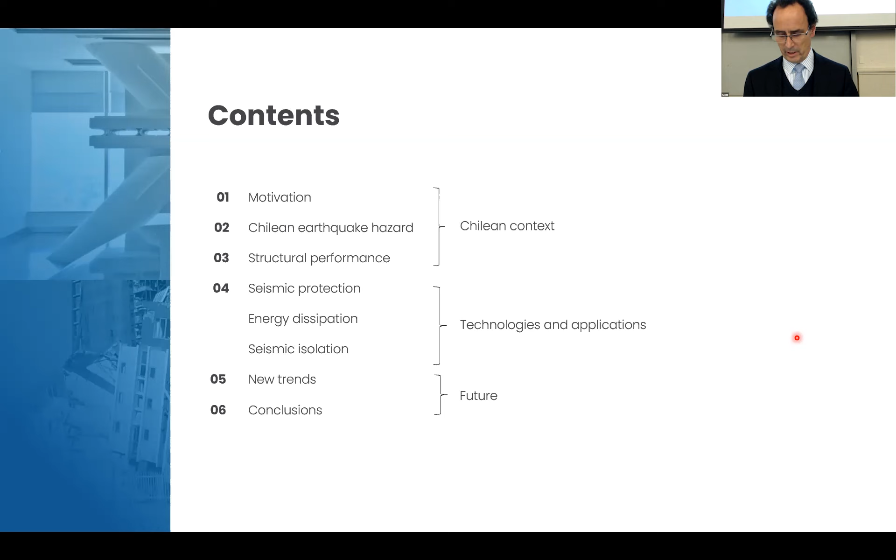Thank you. So the presentation will be mostly in three parts. First, I will speak about the Chilean context - not all of you know exactly what happens with the earthquake problem in Chile. The second section will be more about the technologies and applications we have used. Many of them are probably familiar to you, but others could be of interest. And at the end, I hope I can say a few words on what I think could be the future.

So in terms of the earthquake hazard in Chile, we are actually at the convergence of two plates, the Nazca plate that moves about 7 meters per century - that's about the convergence rate of the two plates - and the South American plate. The Nazca plate goes underneath the South American plate, and we get along this trench different sections where the plate is really locked, completely locked, 100% locked.

The other thing is that in Chile, we've been increasing tremendously the amount of data we're gathering from these earthquakes. And when I saw the QuakeCoRE project making New Zealand a natural laboratory, we speak about the same in Chile - we want Chile to also be a natural laboratory for earthquakes. So we have an opportunity here of joining these two natural laboratories.

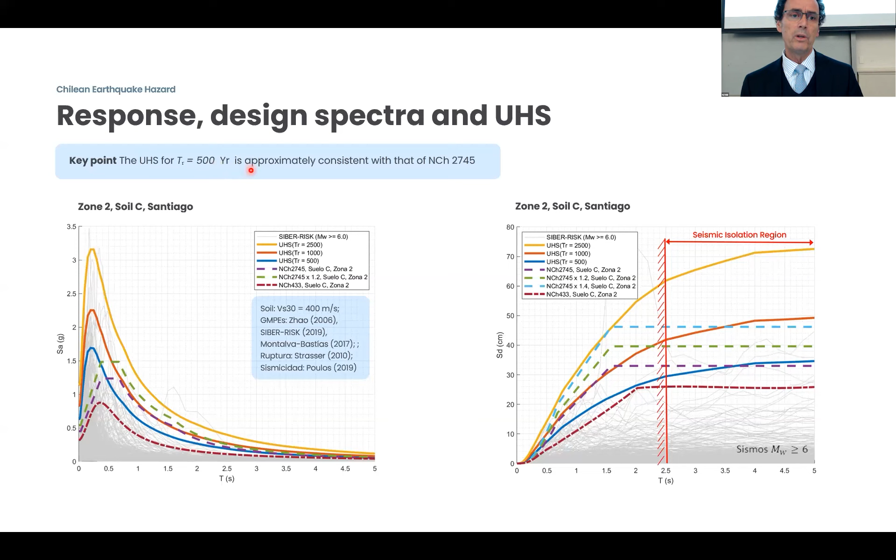In this case, the typical design in Chile is done for seismic isolation, for example, with periods that go above 2.5 seconds. We use this spectrum here in purple, which is more or less not too different from the new uniform hazard spectrum for a 500-year return period. We have another spectrum for seismic isolation, for the 1,000-year return period.

One thing that's probably new is that we've been using satellite data to try to get good information about these earthquakes.

So if you get rid of several other components, you can compute the displacement field of the crust in the direction of the satellite. We use that data, that displacement field, and do an inversion problem, and we get the slip distribution of the fault using relatively simple Okada formulas for doing that.

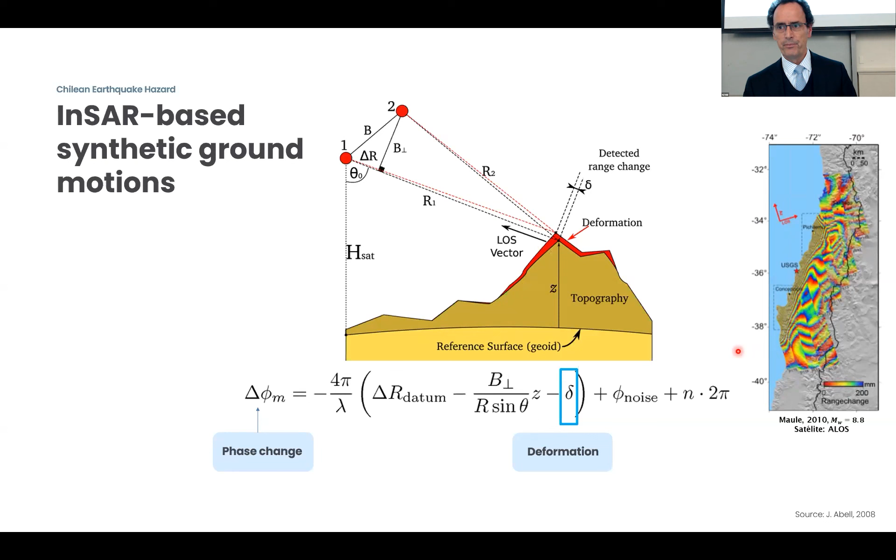This is the case for the 2010 Chile earthquake, and we obtained from the interferometry the figure shown to the right. If you look here, the length of the rupture is about 550 kilometers long. That was an 8.8 magnitude earthquake in 2010.

You go back and do this inversion problem, and you get, for example, slips of the fault of about 12 to 15 meters. The epicenter was here. This is the first earthquake we've recorded in Chile that is called bilateral, it ruptures the fault toward the north and also toward the south. First time in history that we know of, at least in more recent history.

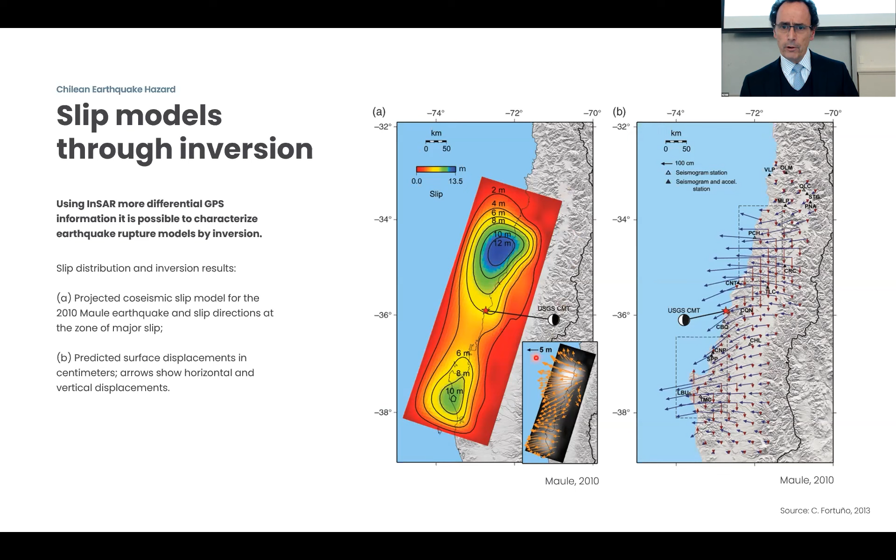So once we get this data from the slip distribution of the fault, we can compose these low frequency ground motions. We combine that with stochastic models for the high frequency signals, and we compose the two. We create these synthetic ground motions that, if you integrate them, are able to capture the displacement, the residual displacement of the crust.

I was really interested in this because we were working on some problems in practice. For example, LNG tanks that have sloshing periods for the fluid of about 20 seconds, that's the period for the tank sloshing. So I needed data useful in terms of displacement and low frequency motions to see if the isolation system somehow goes into resonance with the sloshing modes and things like that. That was the reason that motivated this part of our work.

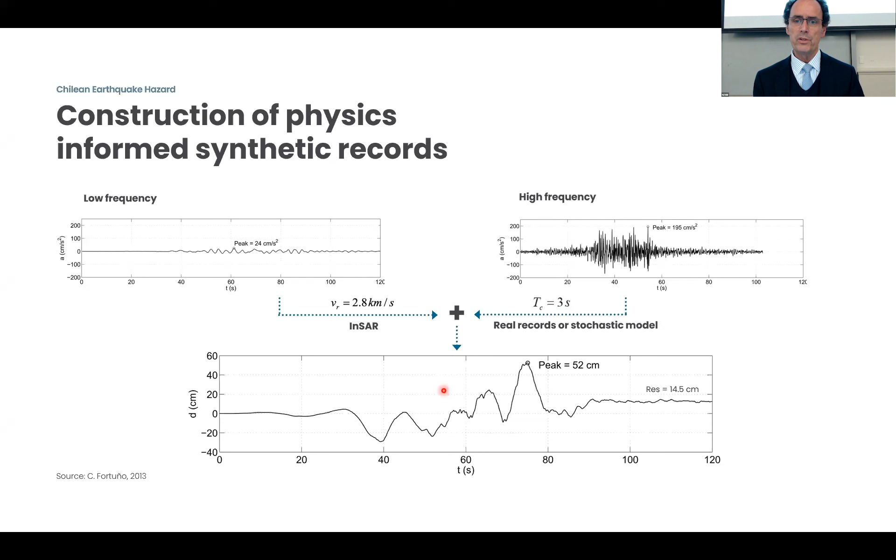So basically what we've done today is take all the Chilean records and reprocessed them to really capture not only the high frequency part, which is always rather well captured, but also the low frequency part. This is basically the database we created, and you can access this today.

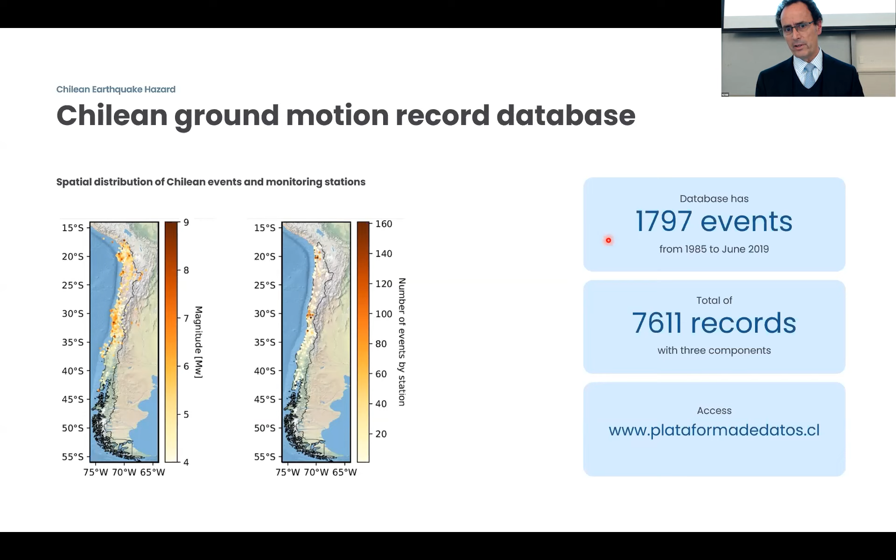We took all the Chilean records and reprocessed them, and they are available in this platform for Chile. This is the database we're using for creating all the new ground motion models for the country.

The second context I wanted to speak about is the typical Chilean building configurations, probably not too different from the ones used here. But I was really concerned before the 2010 earthquake with this type of configuration: a shear wall core at the center and a perimeter frame, very common for office buildings in Santiago today. This configuration was never tested before in Chile with a 1.5 minute long earthquake, so that was the reason for studying this.

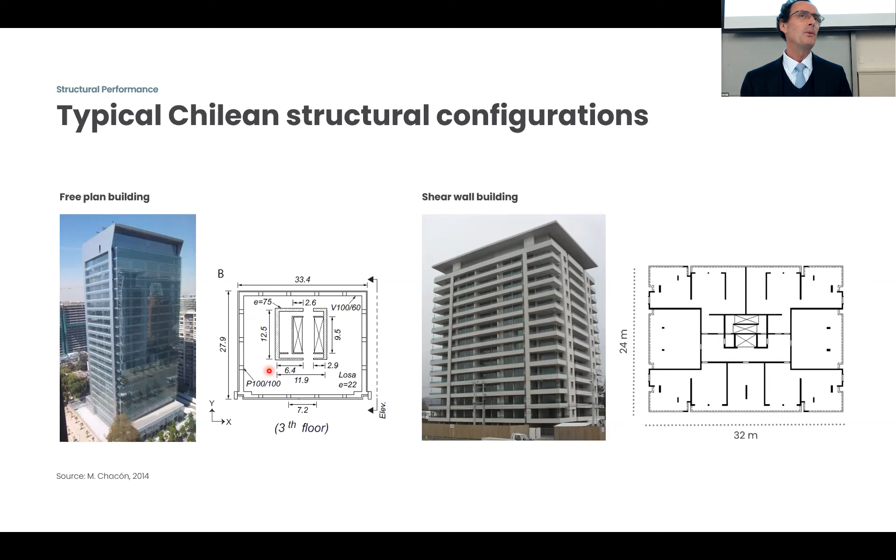We had shear wall buildings, fishbone type structures, that did so well in 1985 in the Chile earthquake that many researchers in the world spoke about the beauties of this configuration. Guess what? What worked really well in 1985, the building on the right, didn't work so well in 2010. So we discovered new things. We'll see right away why. And these buildings on the left did incredibly well, although we were really concerned.

The question is, was it obvious? This escaped every single structural engineer in the country. The best ones never realized that this could happen.

We had this experience in 1985 in the Valparaíso Algarrobo earthquake, and all the buildings in Viña del Mar and Valparaíso, the coastal cities near Santiago, did very well. But suddenly we saw this compression failure of the boundary element, with spalling of the cover, then buckling of the longitudinal bars, and then the rupture just propagating into the web of the wall. Big thing.

60 buildings like this in Chile. Only one of them collapsed, but 60 that could have collapsed. We started working, and a lot of people, not only us but many others, started working on trying to understand what happened here.

What we discovered right away is that this has a lot to do not only with the confinement of the boundary element, but also with the axial stresses on these walls. Very high axial stresses. If you look at the mean axial load ratio of these buildings, it's pretty low, about 10%. But if you look at the dynamics of the building, it gets up to 35, 40, even 50% axial load ratio, pretty high, because of dynamic coupling, and the slabs actually play an incredible role in transmitting that through shear.

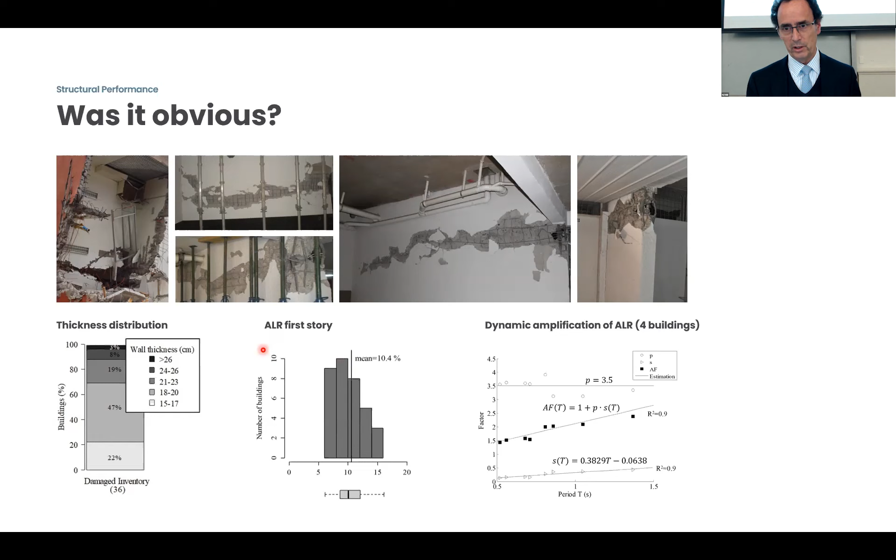So we started really changing the way we design shear wall buildings in Chile. Today we have much better control of the actual stresses on the walls, and we check for confinement and also for ductility of these walls in the design. That was, I would say, one of the most important lessons we learned in this earthquake.

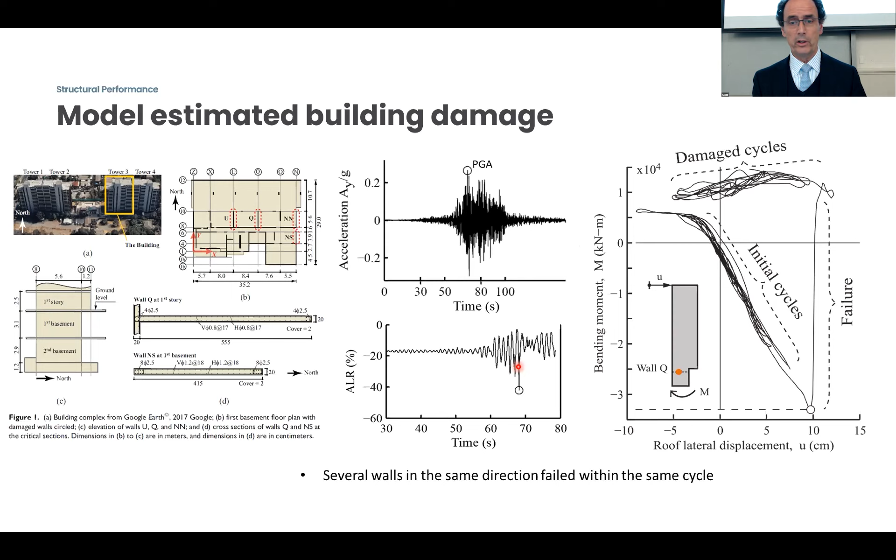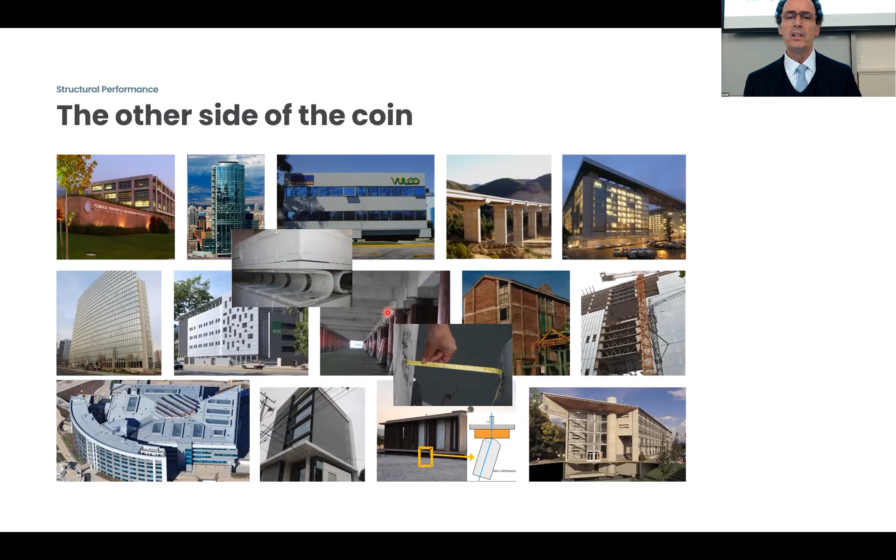But there was another side of the coin, having to do with all the seismically protected buildings in Chile. We had 13 buildings in the region where the earthquake occurred. Since 2003 until 2010, I was really kind of praying in the desert in Chile about incorporating this technology in buildings. We tried different configurations: very tall buildings, precast buildings, ports. All these were different tests, and I think it was kind of a good natural test of these structures, which I'll speak about more in the next slides.

One of the cases that really caught the attention of professional engineers in Chile was this building, 54 stories in Santiago. It was just finished when the earthquake came.

We introduced metallic dampers on these transversal resisting planes. You see here the configuration. Basically, we just changed the concentric braces, cut them, and introduced at the center a metallic damper system. These are C-shaped plates.

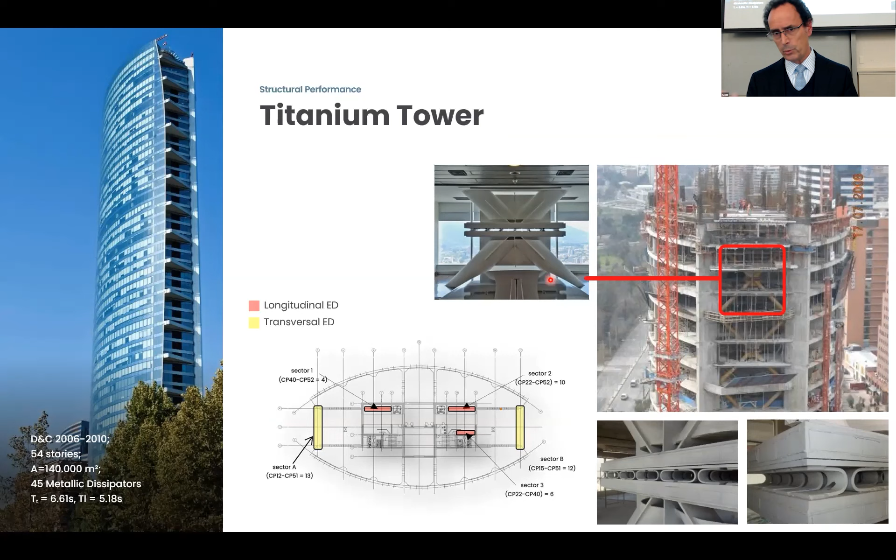After the earthquake, we checked every single plate here. You will see that they are all yielded a lot. Looking at their configuration, we realized that we probably used them up to maybe half of their capacity. That's why we recommended the owner of the building just to leave them there. You could really take them out because these concentric braces aren't taking any actual load, so it's pretty easy to replace them.

The second case that was interesting to the community was this port in the south of Chile, the only one that remained operative after the earthquake. What we did here was interesting: we interrupted the batter piles in the connection to the deck, and we introduced these tables you see here in the plan of the port.

This is 420 meters long with 48 batter piles. We introduced seismic isolation on top so that the lateral stiffness of this seismic isolator is comparable to the lateral stiffness of the vertical piles. Basically, we redistributed all the seismic loads in all the elements of this wharf, and it worked really, really well.

You see here, this is Professor Eduardo Miranda, his hand, by the way. It's a 20 centimeter displacement. Actually, this is basically a PVC pipe that just touched the port, so at least we know that the thing deformed 20 centimeters in that port.

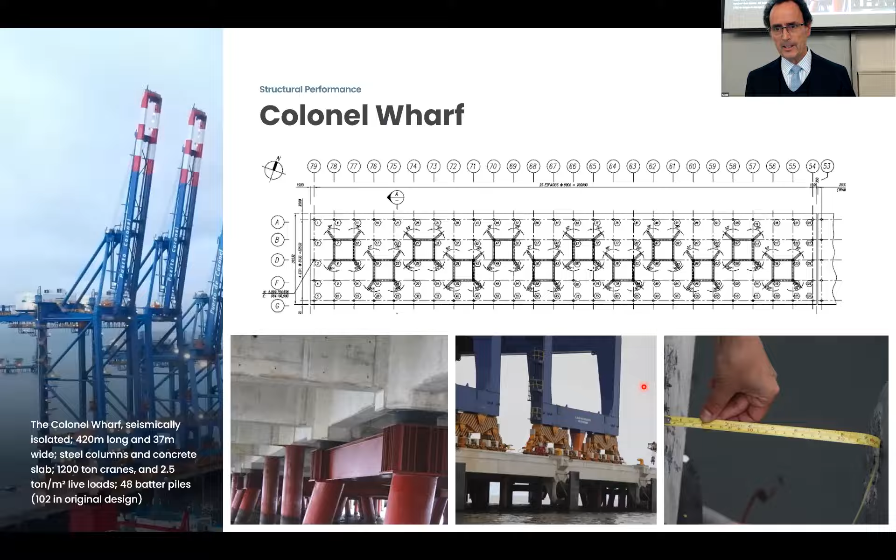So this is basically the motivation, and let's go quickly into the seismic protection ideas. You know very well the two technologies: energy dissipation, where we're just connecting two different points in the structure that have a relative deformation or relative velocity; and seismic isolation, where you really interrupt the direct connection between the ground and the structure.

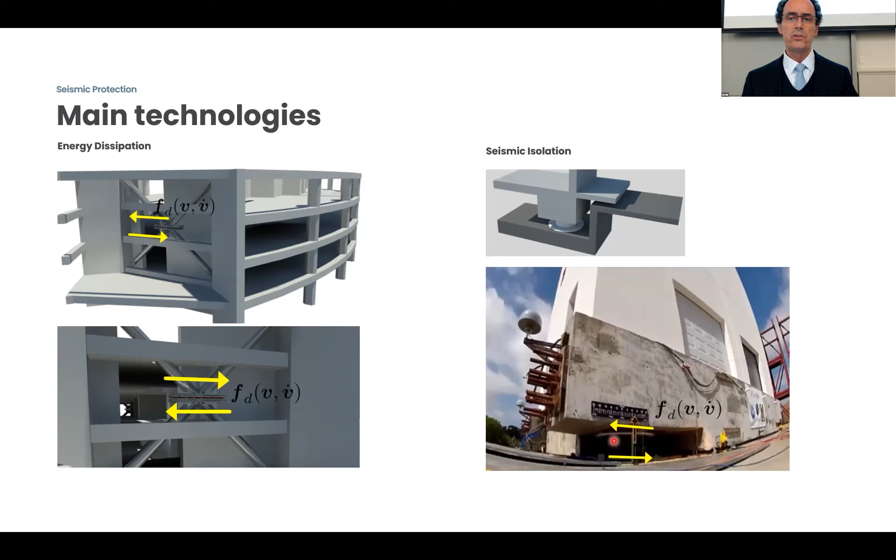You can use the isolation not only on a single layer; you can use it at different heights within the structure. The only thing important for you to know is that in the equations of motion of any structure, what you're doing is introducing a new term, a new restoring force that will help you dissipate the energy that the ground motion is introducing into the structure.

And you are the only real owner—this is an automatic control problem. You really can control that term. You can control it because you control the position of the devices, you control the quantity of the devices, and of course the type of dissipation you're going to incorporate.

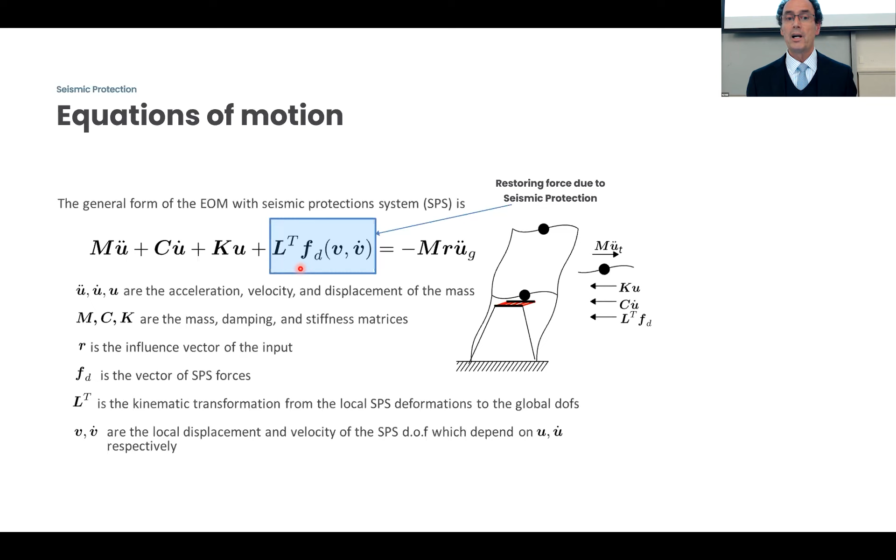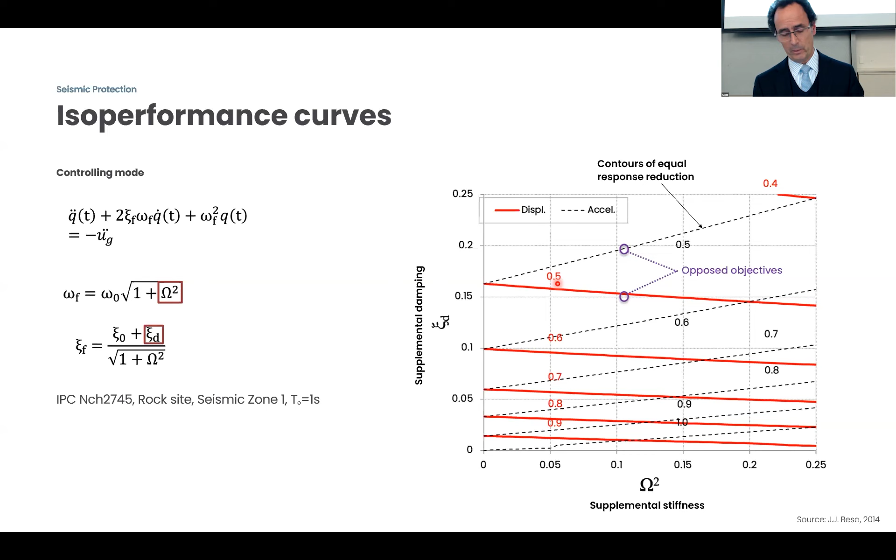So what I'm saying here is with a very simple diagram, you can really define, before you just get into what kind of devices you want to use, exactly the type of design you are going to be getting. You get maybe 80% of the truth with a diagram like this.

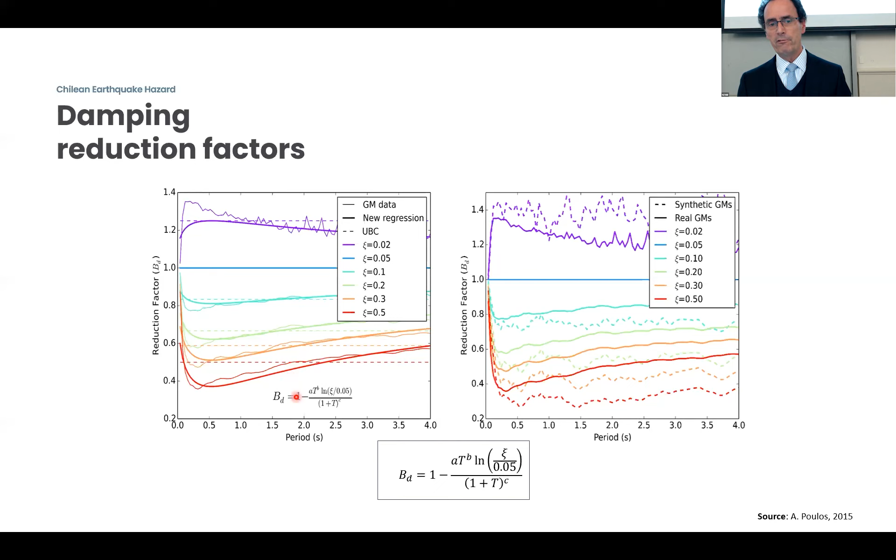And of course, you can compute the reduction factors for damping. These are the new ones that we're proposing for the Chilean code. We made a mistake, actually, because we didn't have the data in 2003 when we just presented the first seismic code, and we used records that were compatible to the design spectrum. If you use records compatible to the design spectrum, they have too much energy and they dissipate too much energy afterwards, and they're not realistic. When you use real records, you get curves like this, where the efficiency, of course, decreases with the period of the structure. So we're just modifying our B factors in the Chilean code now by these expressions.

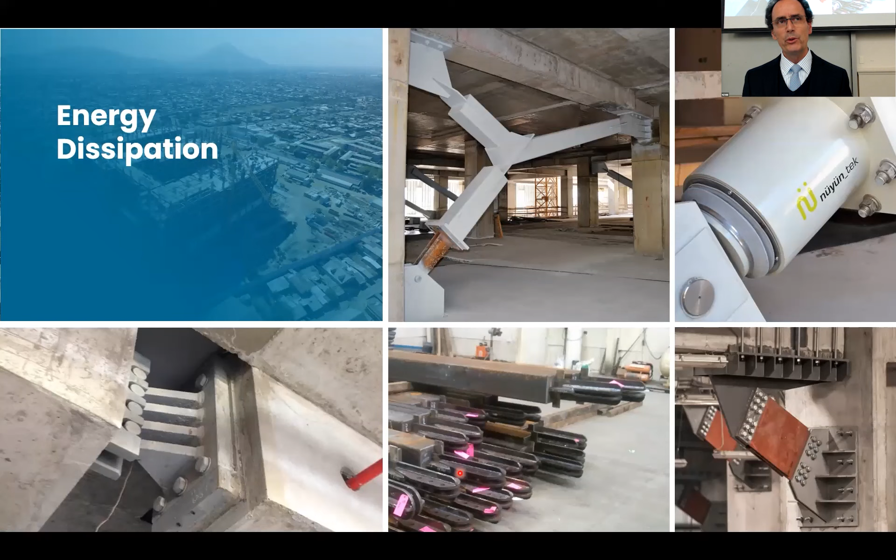Okay, that's enough of the fundamental components, and let's get into the hardware and the applications more.

We tried with metallic dampers almost every single thing, geometries, materials, and so forth. And this is only one example of the kind of things that people have tried. The U-shape or the C-shape damper, by far, in my perspective, I think is the most effective one today.

But for example, we discovered that if you take copper and you just do annealing with it, you subject copper to, I don't know, 600 degrees Celsius, just keep it for 3 or 4 hours, it becomes incredibly ductile. I did this research work when copper was maybe 70 cents per pound. Today at $4 or $3.50 per pound, it's basically impossible. But of course, it's also a good material for resisting corrosion and so forth.

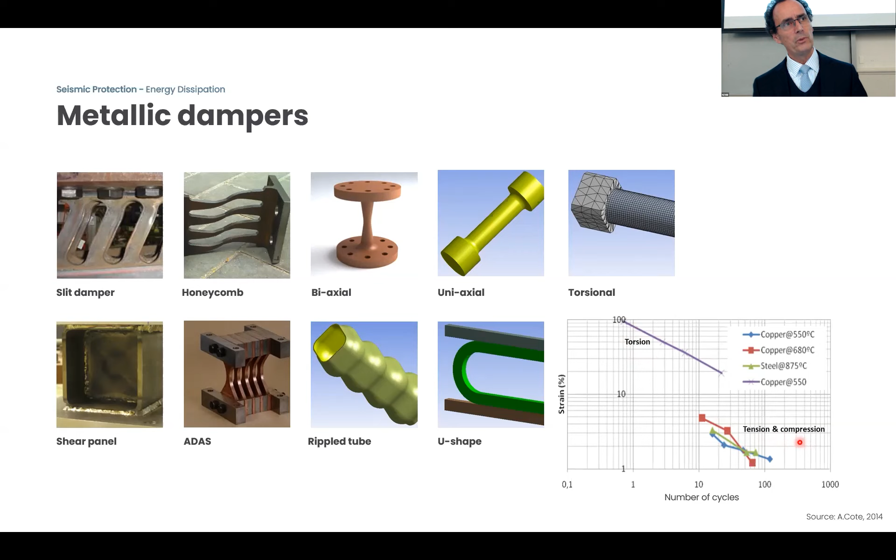But if you look at this, you can see that if you apply this into torsion, you get a very ductile component. So you can define, for example, a metallic damper device in torsion, and it's incredibly more ductile than if you do it in tension and compression. Those kinds of things are interesting, and we've been playing with them for many years.

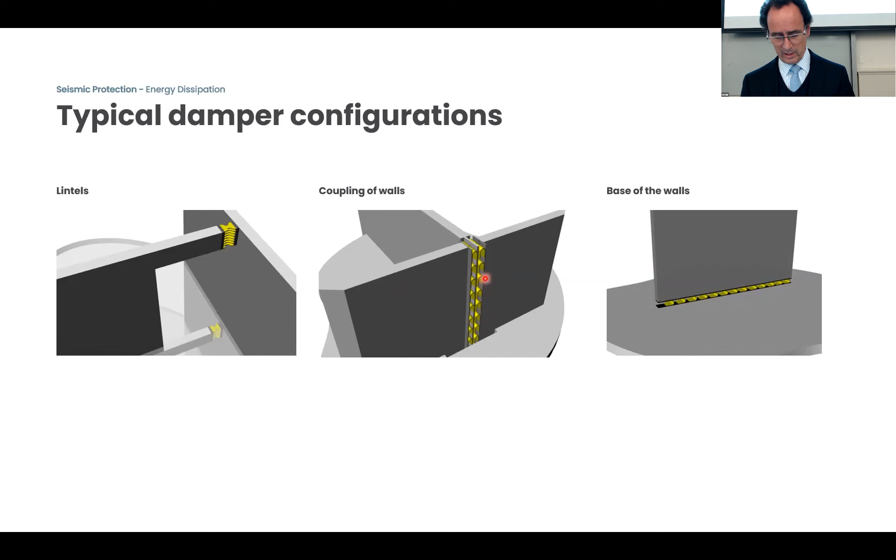The disposition of these dampers can be very different. We've used them as lintels. We've been cutting shear walls or whatever in between, also as lintels, in the other direction. And for example, the titanium tower that I showed you before is one example.

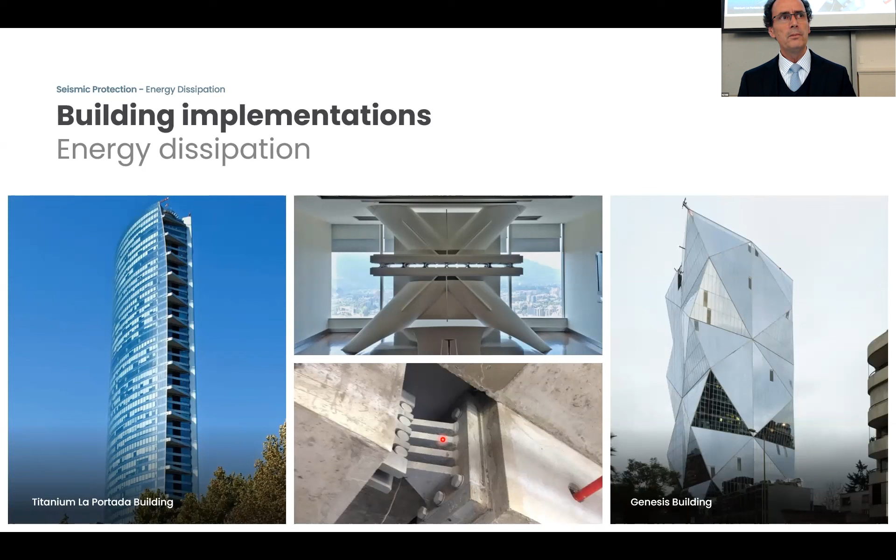Also, in the case of buildings like this one on the right here, we just cut the lintel and introduce these TADAS devices. The TADAS, which I'll show you in a minute, have only one thing you need to be careful of, but apart from that, they work extremely well.

This is actually a retrofit we did in Ecuador for a hospital, a pretty old hospital. You see the dampers there. It's a very trivial solution. You just go and wrap this casing for the beam, and just get the dampers underneath here.

Actually, I could—well, there is a video there that maybe you can run later. But let me see if I can do it. I have to probably escape from this.

I don't know how to do it, but anyways. One thing that is important that I wanted to mention to you is that if this device gets not only in shear but also in tension, because the hinge here doesn't allow the vertical motion, then your device will not work.

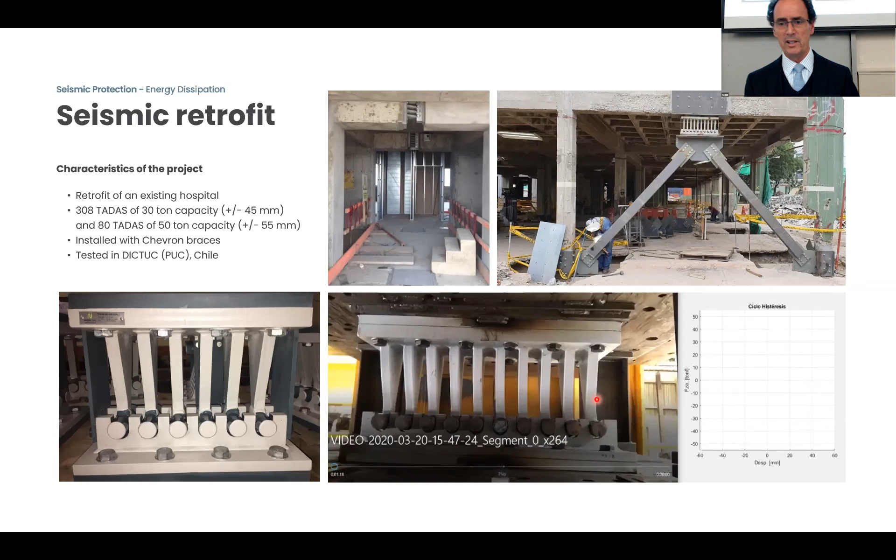What you need exactly is that this goes only in shear, and the plates, when they bend, this point will move up and down, and you need to allow that motion. Otherwise, you're going to get a membrane action on the plate that will basically kill your ductility. That's a very important thing that we discovered after many testing.

The other things we have done is basically self-centering systems. I know there are many ideas around this, but the concept behind is very similar. We were trying to find these flag-shaped behaviors with zero residual displacement. So you get hysteretic behavior, but then the system self-centers. And actually, the principle behind it is very simple.

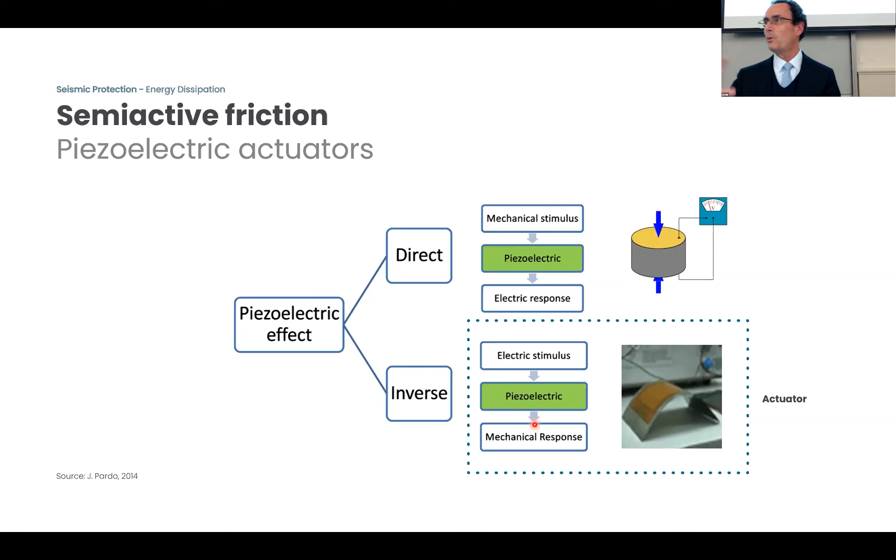They work both directions. So basically, what we did, we introduced, for example, in this case, our plates are sliding one with respect to the other, and we introduced these piezoelectric elements here. So they react, and we apply a very small voltage here and increase the axial load in a semi-active way. So we decide what kind of friction we want for every specific moment on the device.

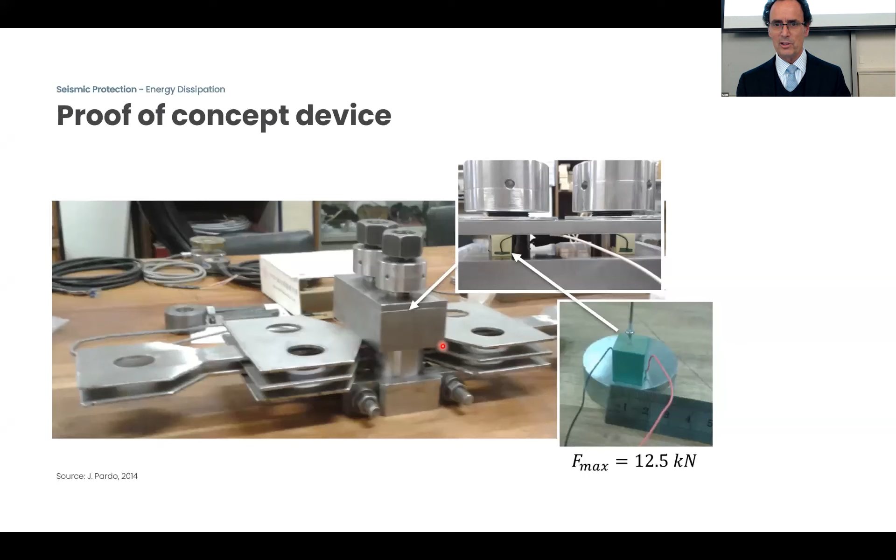This, of course, is a prototype for a laboratory. This can be improved tremendously when you just go into production of things like this. The result is this: you can control friction as much as you want here. Of course, we were not very successful in this dynamic range, we got only a factor of 1.9. I think if we get more creative, we could really increase this range for just modifying friction.

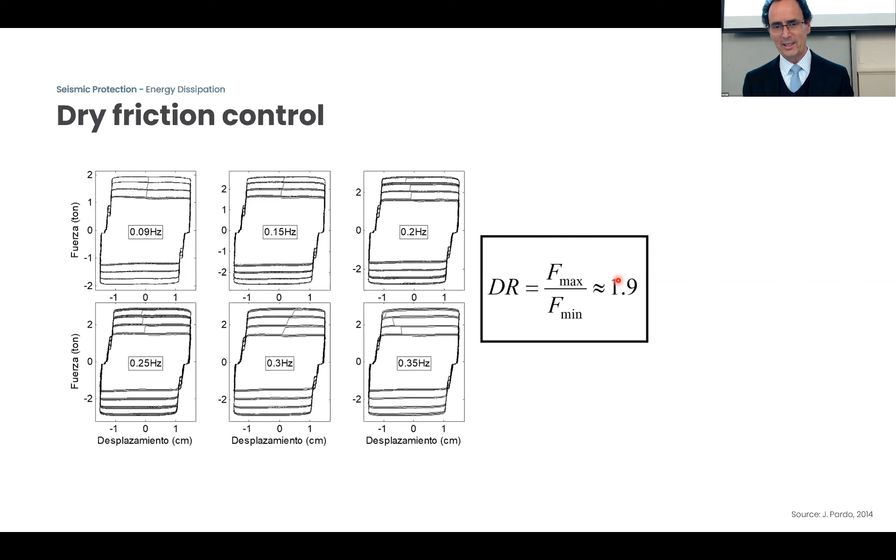The idea is not to have a single device during the earthquake, but have multiple devices depending on the response you want to optimize. That was the idea.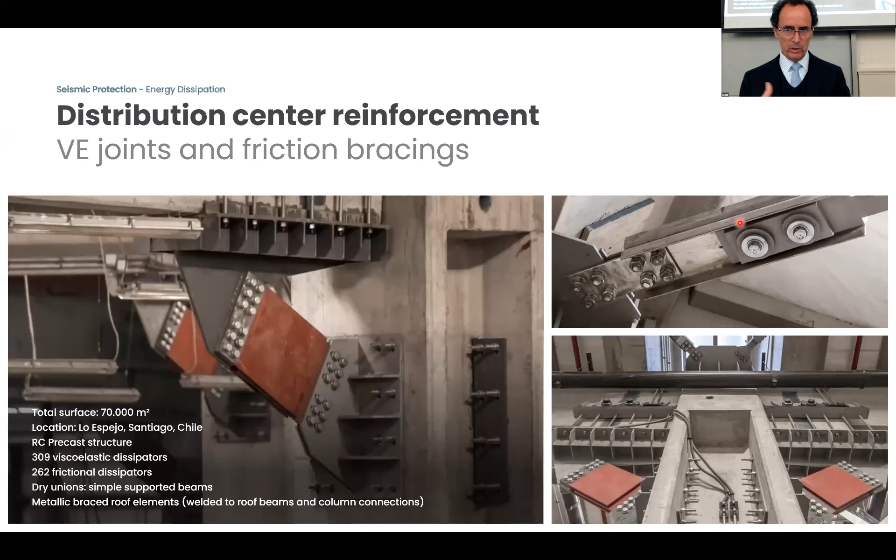The other thing that happened to these structures is that most of the bracings at the roof collapsed in another distribution center, and we just put here a frictional fuse. Basically, it's a very simple system that controls friction force, so the bracings never buckle, essentially. That was pretty simple, and another low-cost solution.

When we move into viscous dampers, the trick here is basically the one shown in this figure, that you have force and velocity, and you want this force and velocity to really saturate. If it doesn't saturate, you're going to kill the joint. So we need this to be like this, and for that, you need to create or obtain a behavior in the silicone fluid that is called shear thinning. Basically, you can really control this behavior only by using the appropriate fluid. That is exactly what we do.

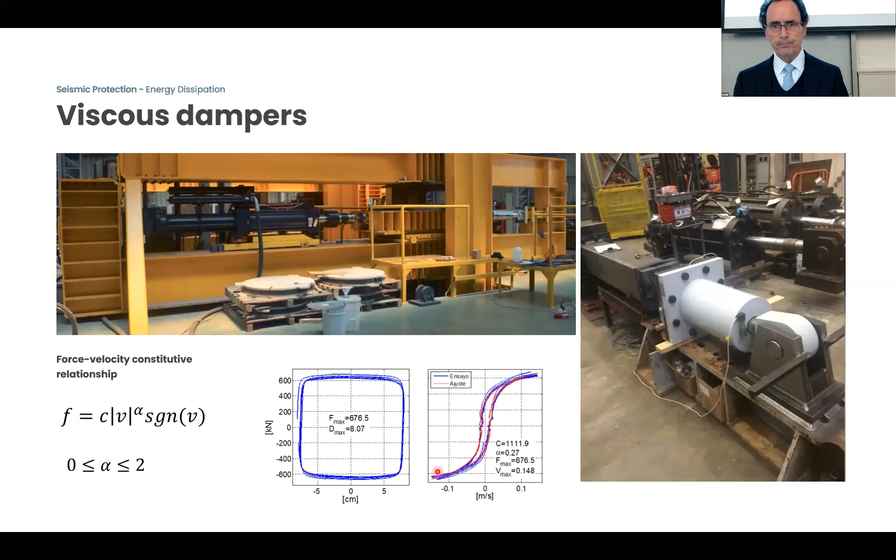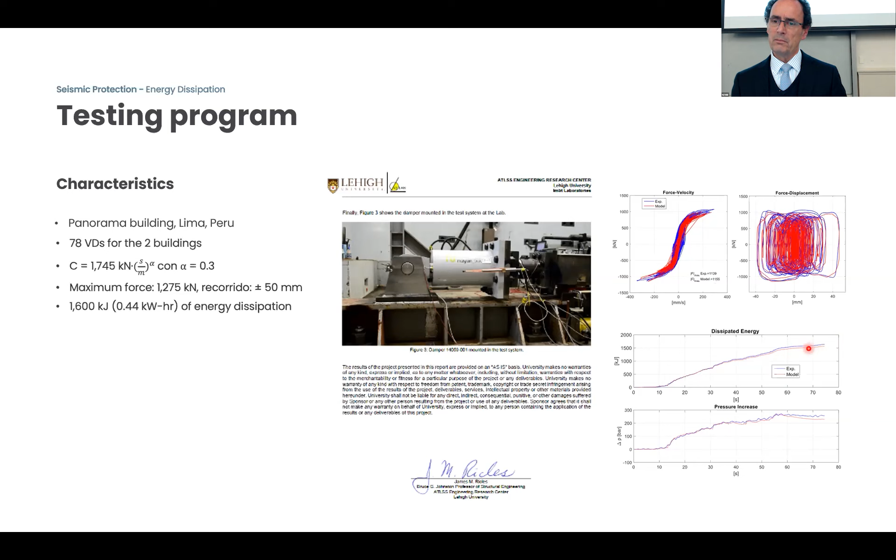This is one test that we did for the Panorama building in Peru, and basically you see that your model expressions match almost perfectly well the testing. One thing is that it also matches well the dissipated energy and the increase in pressure within the damper.

Of course, when you start dissipating energy, the pressure within the damper will increase tremendously. You will see here that we can get up to maybe 250, almost 300 bars within the damper. So you need to design that damper for that increase in internal pressure when it gets really hot.

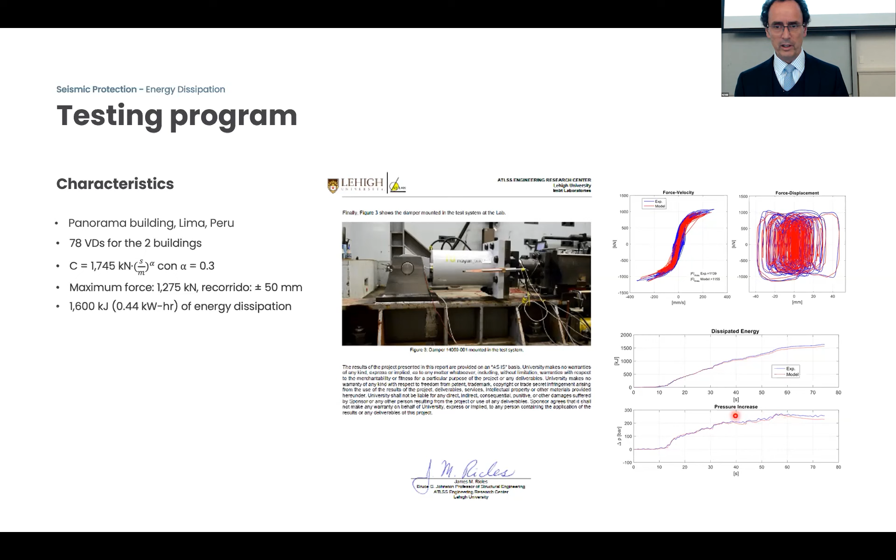And dissipating energy. The modeling is simple. It's basically a Maxwell element that gives you a nonlinear damper here. Remember that velocity is raised to the exponent alpha. We use alpha usually equal to 0.3 in our designs.

And basically we incorporate an elastic element in series with this nonlinear damper, and you create this behavior that has this cycle here, basically due to compression of the fluid. You need to capture that part.

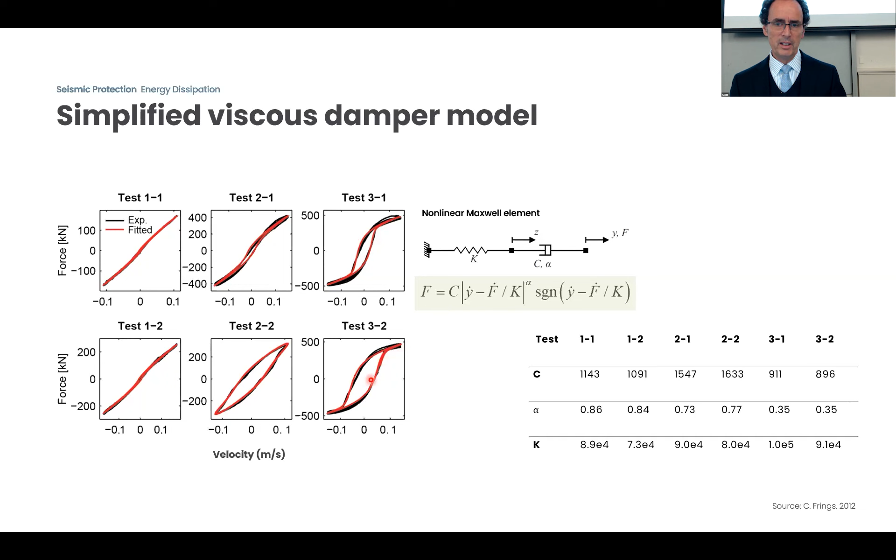And the applications are basically in hospitals. This hospital was very interesting because it has seismic isolation, but also the towers - we could not control the displacements because they are very, very flexible. So we introduced dampers in this toggle brace form.

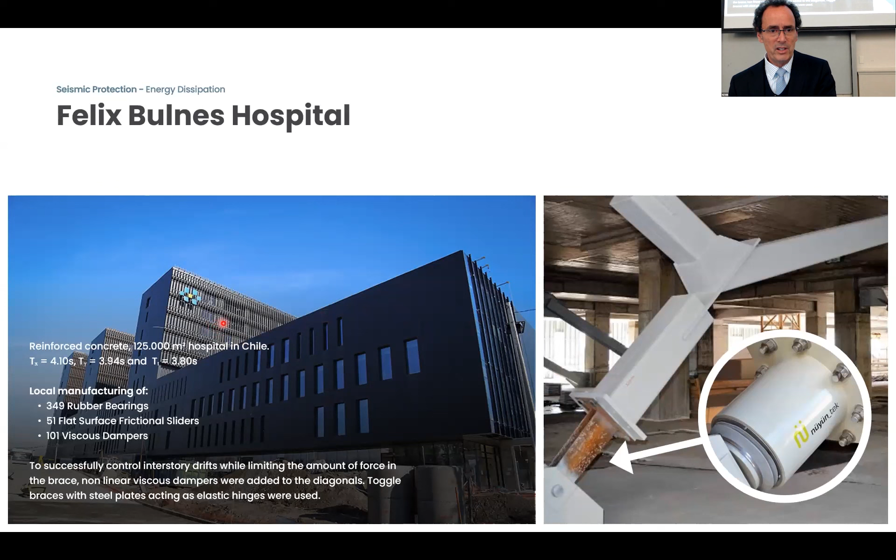And those dampers, basically viscous dampers, since the force is really controlled, as I said before, because of this shear thinning behavior, the joints and the columns could remain the same. We didn't change the size of the columns and beams. That was, I would say, the important thing we did for that element.

We are introducing 28 viscous dampers with toggle braces in this case, because deformations are too small, only 2 millimeters, and we need to amplify those deformations for using the dampers. These dampers are relatively low in capacity, about 5 tons, but need to be resistant to deformations for a future earthquake as well. This is a project that is being led in structural engineering by Mott MacDonald.

The disposition of the dampers, as you see here, there are 28 dampers in the whole building, and they are located in these 2 resisting planes. This is a building that has a very strong asymmetry in the X direction. And the torsion that is created here is controlled by the orthogonal resisting planes. So also the dampers would help slightly on that part.

Because of that, we proposed to use a tuned mass damper on this side of the building to control the torsional mode of the structure. But at the end, it was discarded. I will show it in a minute. But it's a very interesting tuned mass damper, by the way.

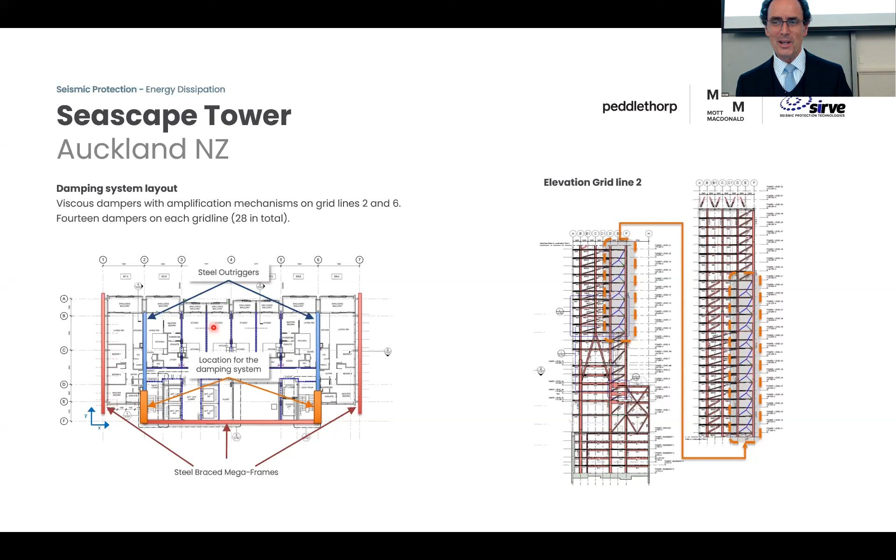The toggle braces are very simple. You see here, they just cross the beam, and basically there is the viscous damper. The angle here is 6 degrees. The amplification we get here is about 5. So basically, these 2 millimeters just change into 10 millimeters for the viscous damper here.

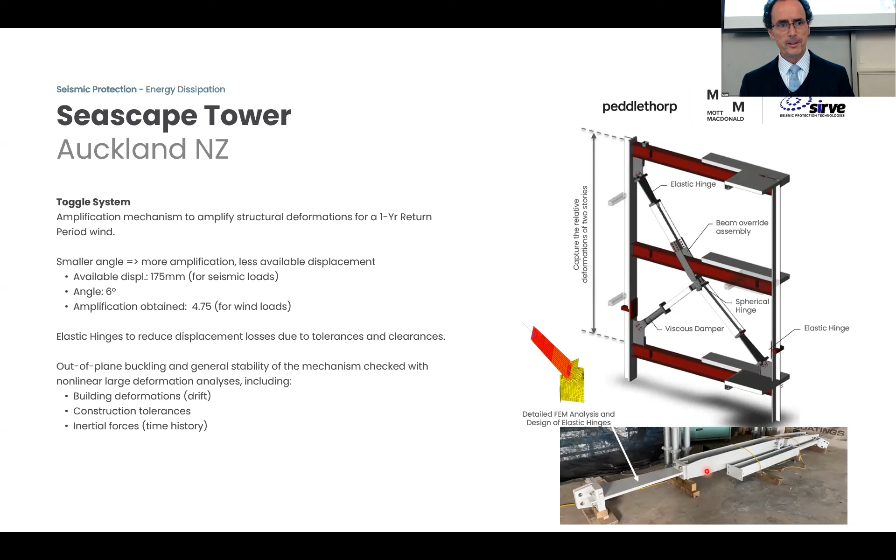And I went to the construction site yesterday, and you see here the toggle braces are basically already at the site. These are the dampers. As I said before, the force velocity expression has this alpha coefficient here. In our case, this alpha is 0.3.

Okay, these are 50 kilonewtons. Dampers are pretty small, but need to be very, very precise. So they're going to be tested before we install the dampers and after the dampers are installed.

Also, we need to simulate. We did a multi-physics model here for simulating the dissipation of heat. That's why you get these fins here in the casing of the damper, to be more effective in dissipating heat.

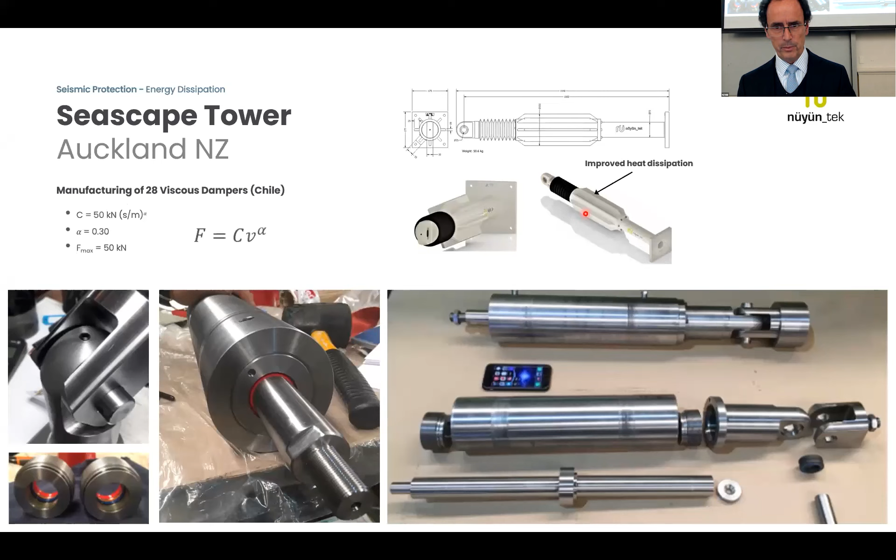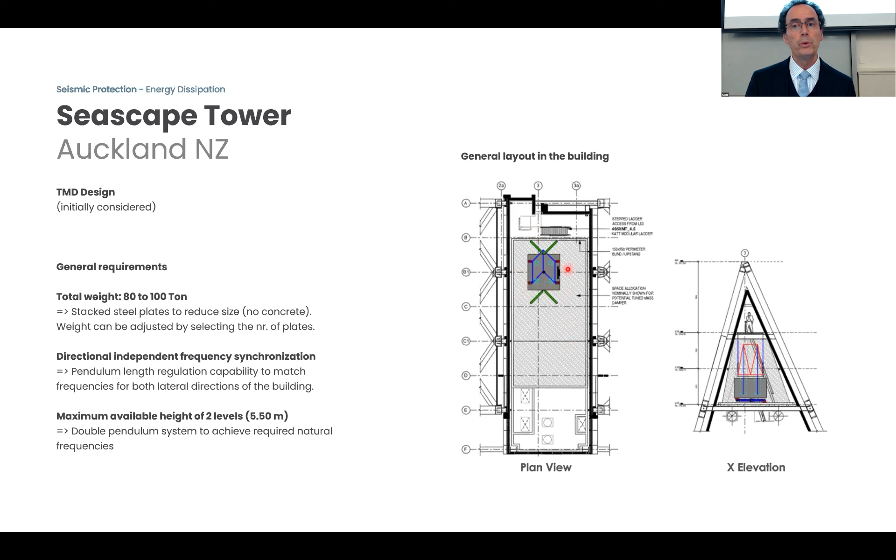This idea, well, you'll never see it built, but I just wanted to mention this. We introduced this idea of the tuned mass damper. It's a tuned mass damper that was synchronized in the 2 different lateral directions. This was the design. Basically, you see here that there is an element that I'm showing here with the pointer.

That element basically changes the length of the cables, so you can tune the frequency in one direction, and you can tune the frequency in the other direction. So it's a single damper that tunes the two frequencies, which is a kind of interesting thing.

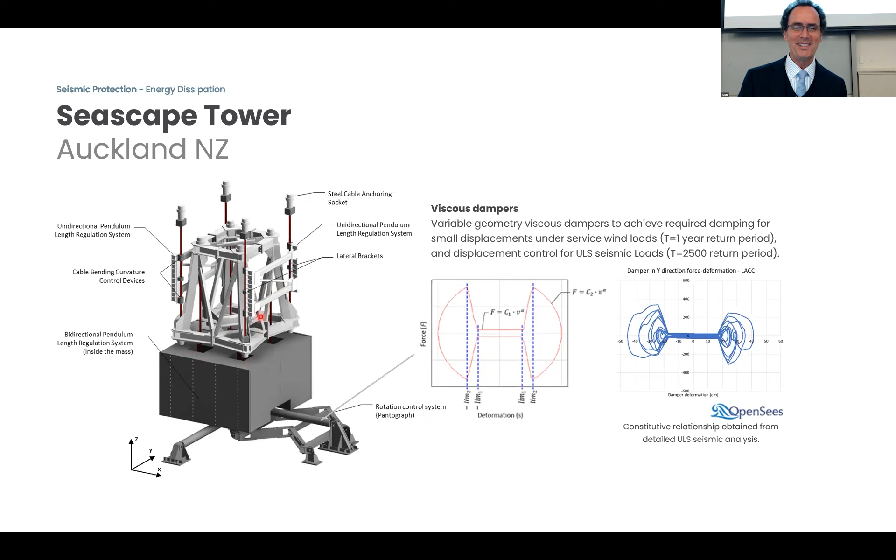At the bottom, you will see this pantograph here, just to avoid rotation relative to a vertical axis. And we're using these two viscous dampers that also had an interesting thing. For wind, they had this performance, and for seismic, it had this larger performance. So we designed a damper that has these two different behaviors coupled in a single device. It's really a shame that we are not going to see this implemented in the building.

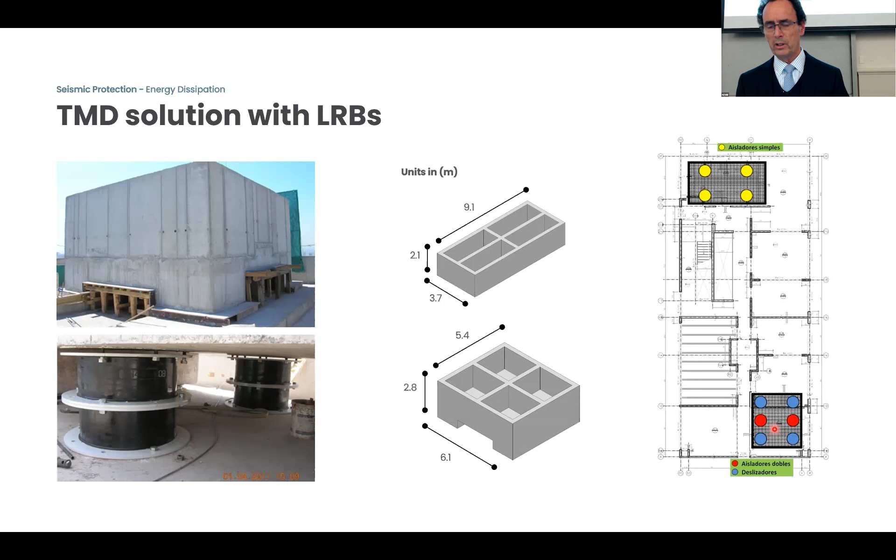In other cases, the tuned mass damper solutions, this is for the Chilean typical residential buildings. We just use masses on top of seismic isolators. All these spaces here, we just fill them with grinding mill balls that we use from the mining industry, and we get a very heavy concrete there for just having these devices. We usually take two dampers on top of the building to control the lateral modes, or sometimes one lateral mode and one torsional mode.

These are a type of building we're incorporating tuned mass dampers in, in Santiago. And a final solution for tuned mass dampers that was implemented in 2010 is basically a magnetorheological damper we just put on top of this building here. I don't know if you are familiar with the concept, but it's a viscous damper, essentially, that you can change viscosity when the fluid goes through a magnetic field.

And you can really control the magnetic field with coils. It's pretty simple in milliseconds. So you can have a damper that is 1 ton or 15 tons in capacity in 1 millisecond. So the idea is to select the right damper at the right moment in the response of the structure.

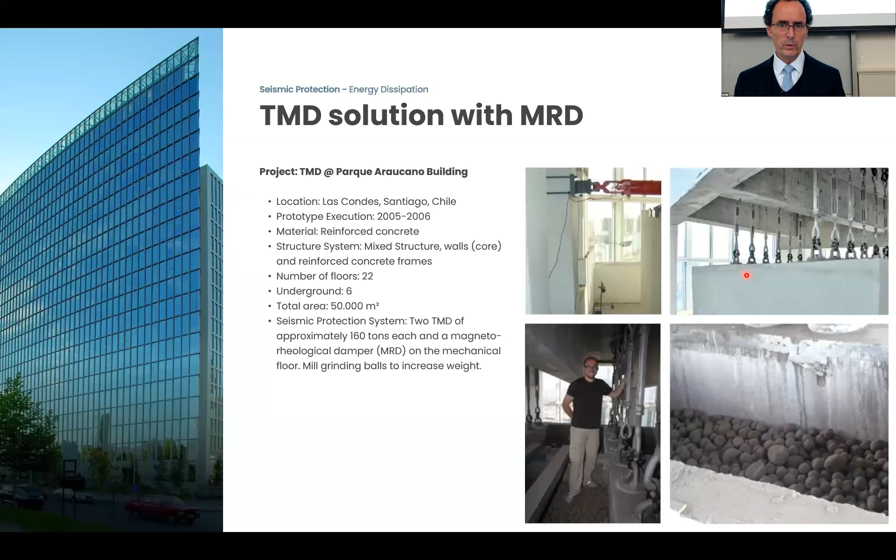So we implemented this on this building with this pendular mass that we have here. Then after the earthquake, we decided just to go for a much bigger implementation. This is the damper. You see the four coils there. Those are the coils where you're going to be creating the magnetic field.

So the fluid will just go through there and will become basically a solid when it does. There's two or three producers in the world that produce that magnetorheological fluid. One is actually in the US. And so the damper is underneath here, the tuned mass damper.

And basically the idea, of course, is that with a tuned mass damper, if you do not introduce damping, the energy of the tuned mass damper will return into the structure. So you need to dissipate it somehow. And this is the whole system we did for doing that.

Probably the most novel thing that we did in this case was the control of the mass on top of the building with a physical control. If, for example, the mass is going one direction and the building is going in the other direction, we just engage the damper. If the mass of the tuned mass damper is going in one direction and the building in the same direction, we just release the damper. Those kind of things.

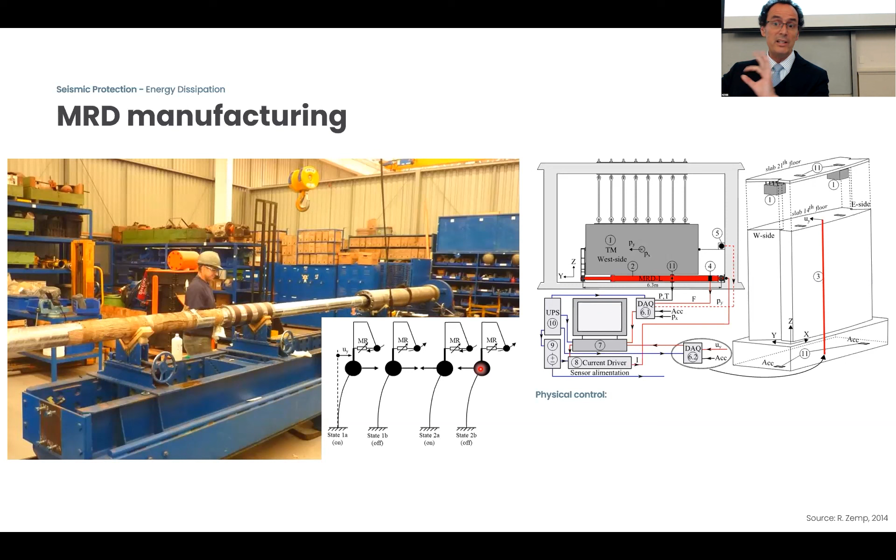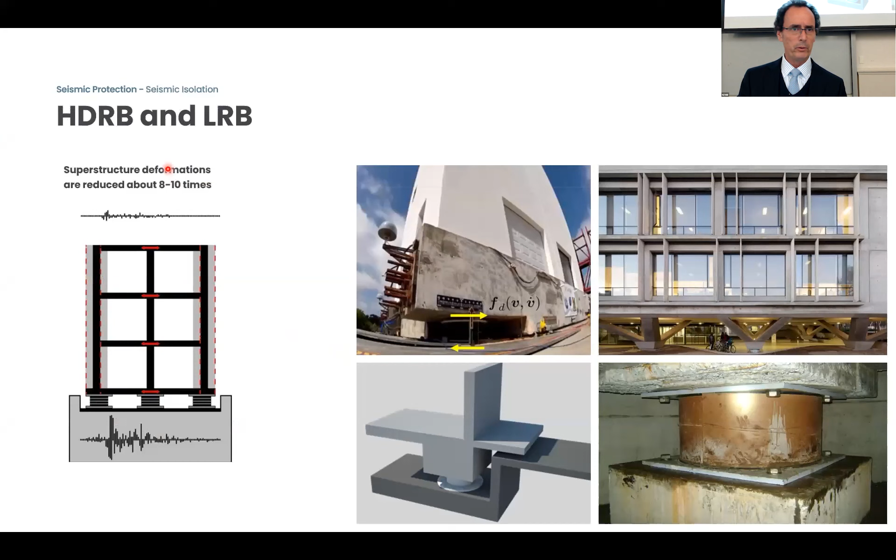I'm going to go very quickly on this because this is more familiar to you. Seismic isolation, high damping rubber bearings and lead rubber bearings.

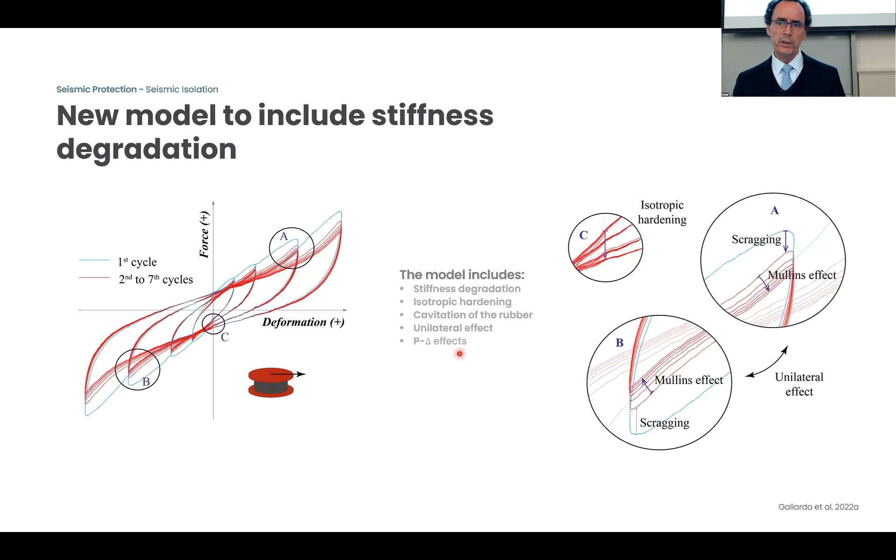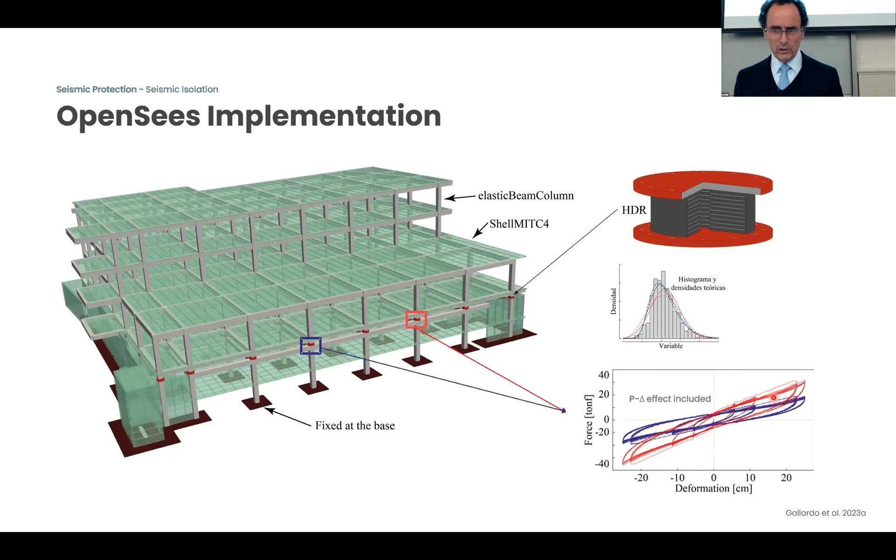We cannot do it with the same model. Even the models that OpenSees has today do not really correctly include the P-delta effect.

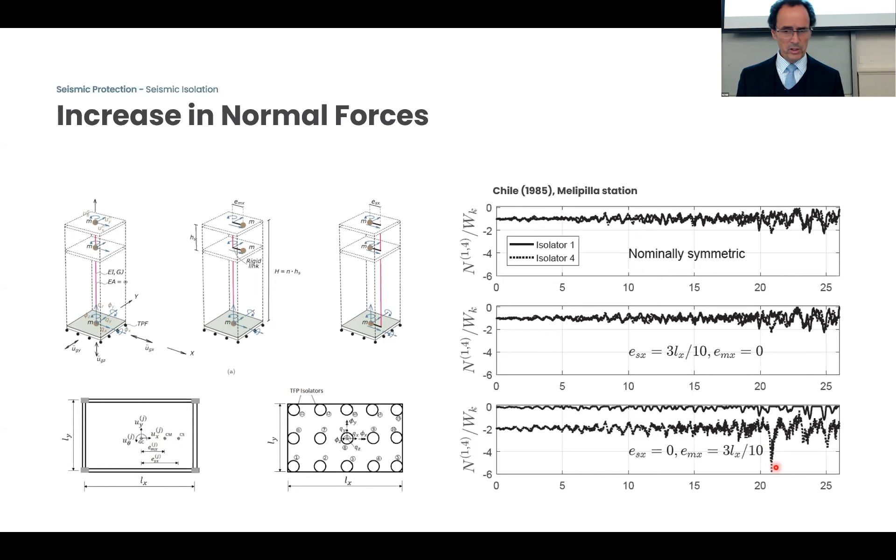In terms of the frictional pendulum system, we've done a lot of work and analysis. My interest here is on the axial loads on the FPS, because there's a comment circulating that the FPS can control torsion in a building naturally, since an eccentric mass will load some isolators more and the system will self-control. It's not true. If you incorporate a mass eccentricity of 0.3 of the building plan length, you increase the axial loads in the system sometimes up to 6 times because of overturning. The building loads more, some isolators create higher frictional forces, and with the other component of ground motion you get rotation. So this is not simple, and that's why it's important to model it correctly.

One of my ideas for a long time was to create very low-cost isolators, especially for social housing in Chile. Rubber in tension is three times more effective than rubber in shear, so it's easy to change rubber in shear to rubber in tension. We developed this device with tendons that buckle when they go in one direction and extend in the other. It works really well, and you can get good lateral stiffnesses of the order of 0.5 to 1 ton per centimeter, which is reasonable for this type of housing.

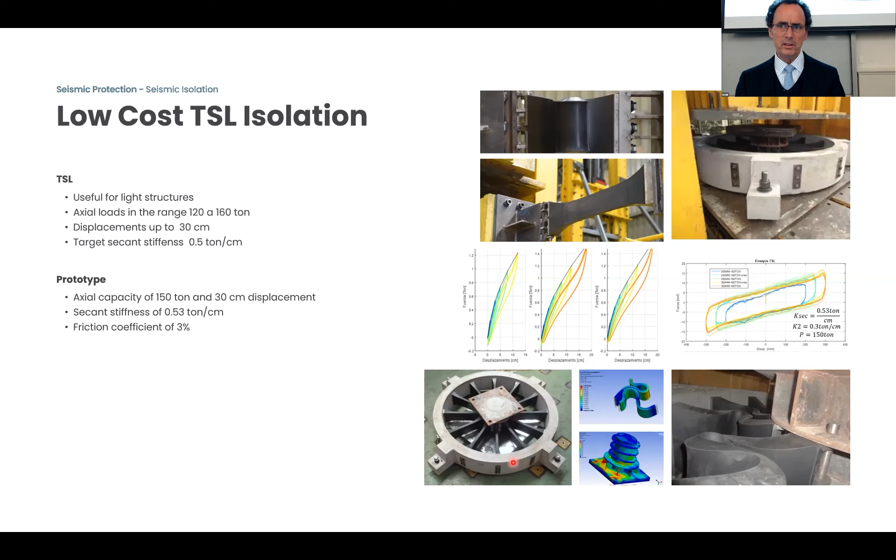We implemented this in different places. Another low-cost solution for seismic isolation is to have a slider and a ring made of just rubber, with no steel shims or anything. Very simple - the ring works as a spring and the slider dissipates the energy. Look at the force-deformation cycle - it's just perfect, easy to implement, and costs about 20-40% of a normal isolator. So those are the kinds of things we're really interested in promoting and using.

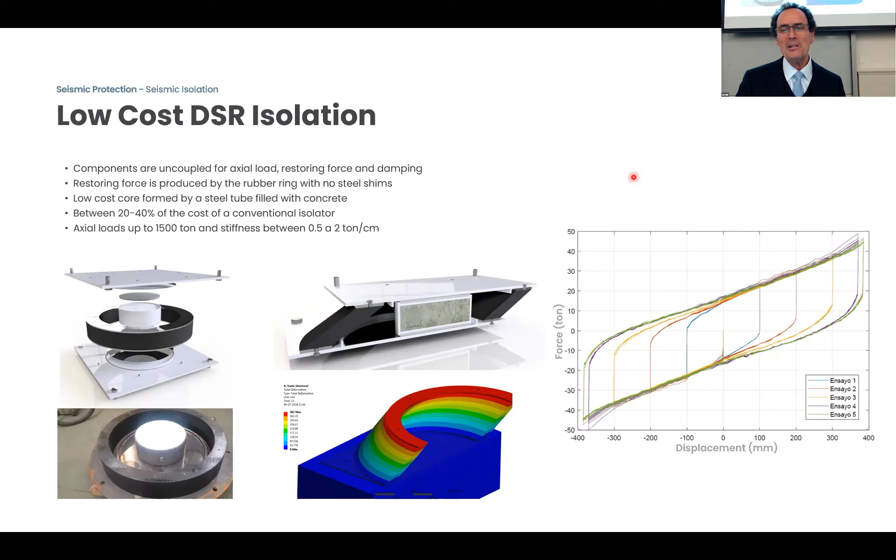I've been in a position for my last 5 or 10 years of just giving away all the information - no patents, nothing. I have no interest in IP. That's why I'm presenting all these ideas.

Another final example is for special places where the soil is not good - we use a pile that actually has a rolling surface. It's basically an element with a pre-stressed tendon in the center, and you can define whatever geometry of the rolling surface you want, controlling exactly your force-deformation cycle depending on that geometry. We implemented this in a house in Santiago presented in 2010 - like a house on top of rollers - and it worked incredibly well. Here you see the piles of the house, and we used a single rubber isolator just to make the system self-centering.

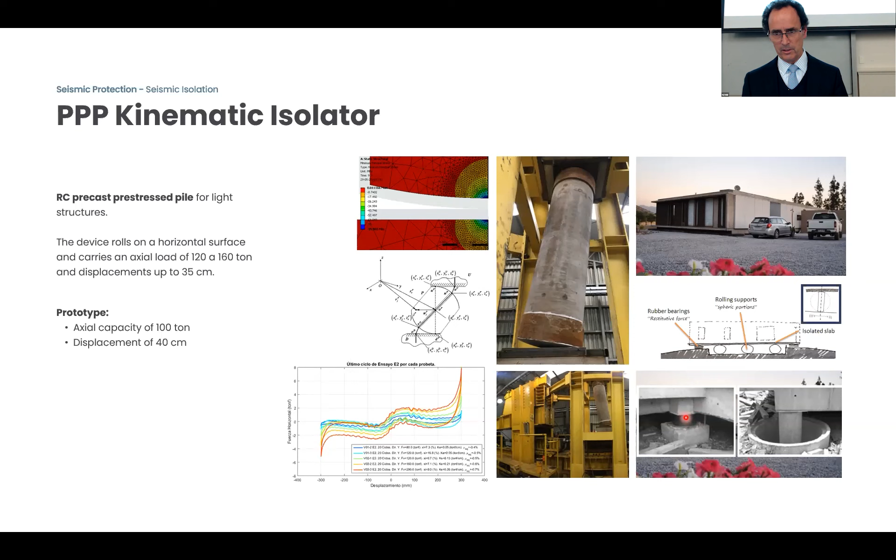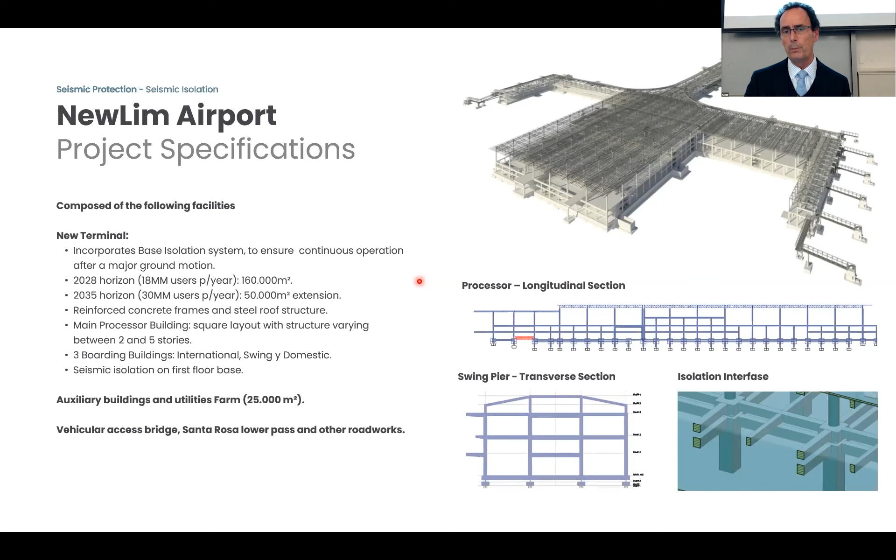I'll finish quickly. The new airport in Lima is something we're working on today. I wanted to show this example because one of the big issues has been uncertainty in the properties of the isolators. We had to run testing on smaller isolators to get the viscous component of the rubber, which we hadn't done before. We couldn't test this with the capacity we had in Chile, so we tested a smaller isolator and created the factors needed to incorporate upper bound and lower bound stiffness and capacity of the isolators.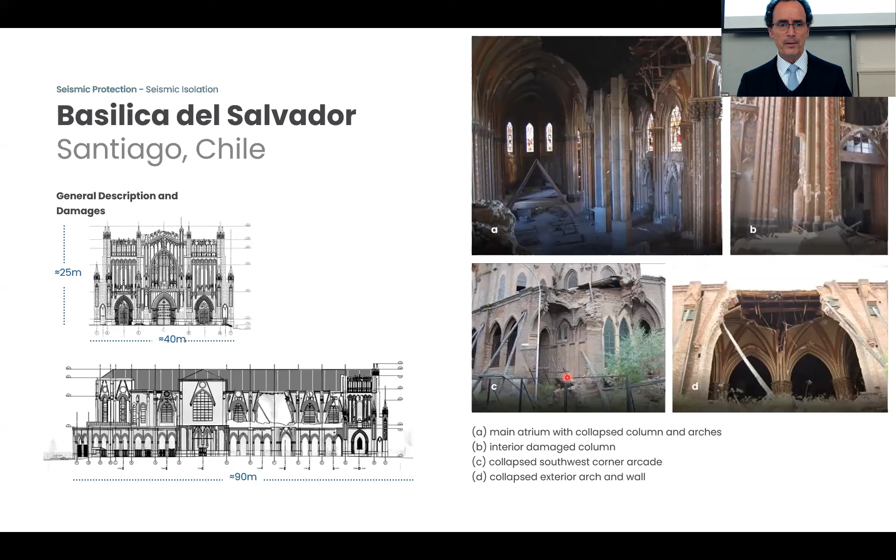One of my final examples is basically this basilica that was destroyed by different earthquakes in 1985 and 2010. This is a beautiful building. The way we're planning to do this is first to stabilize the structure—this is already done. Once stabilized, we're going to go underneath: build collars on the foundations, put in piles, excavate, build the underground structure, put in the isolators, and then cut the piles. That's the process we'll implement over the next years for this building.

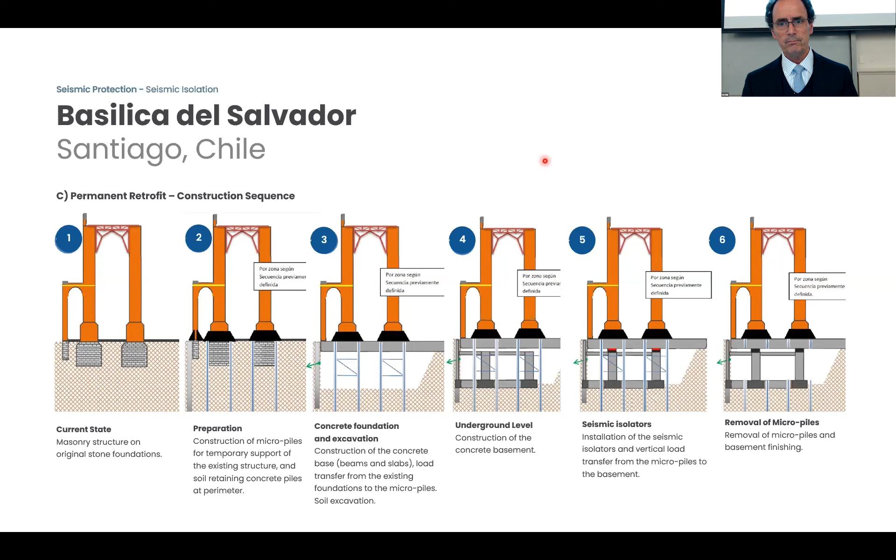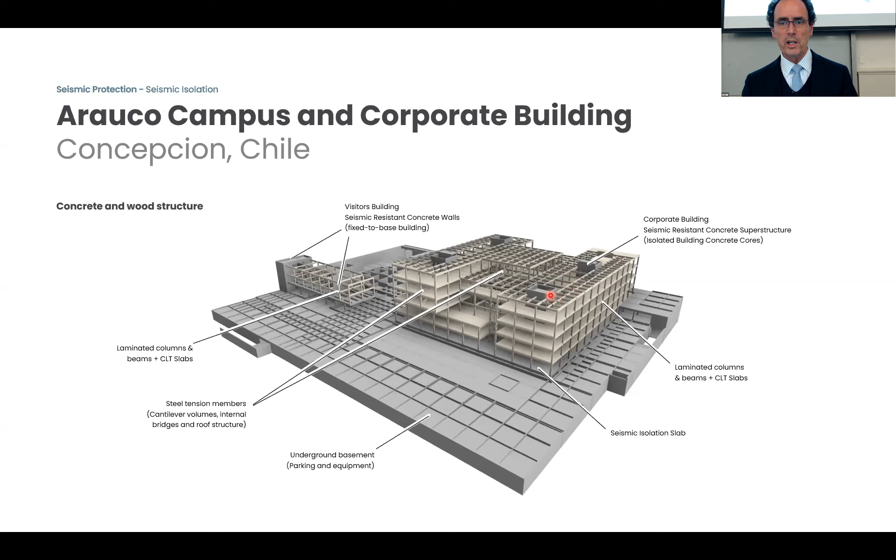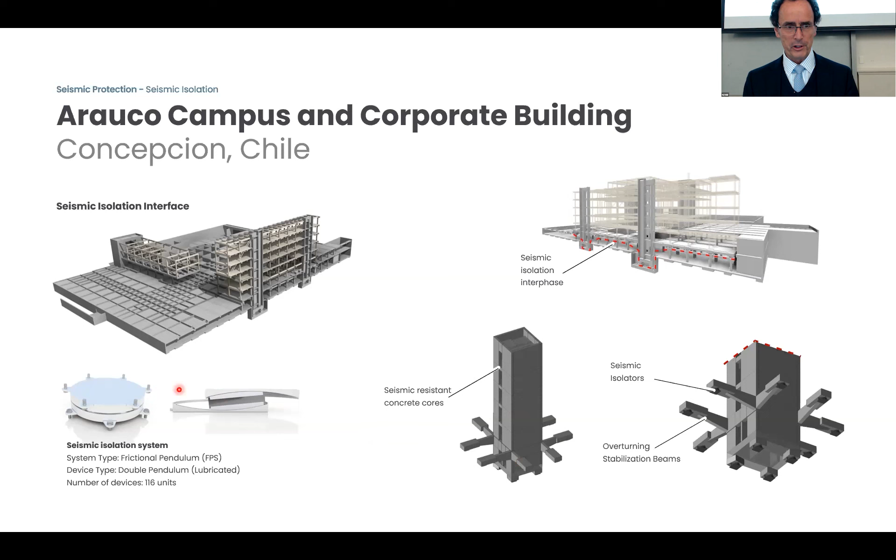Now, timber buildings—a fantastic building in the south of Chile, completely timber, but it has four cores that are concrete. With this type of structure, the core captures all the seismic load, and if you put isolators at the bottom, you get tension on the isolators. So what we're doing is taking these shafts and increasing the legs so we can reduce the actual loads. It's a very simple solution, and we're implementing it with frictional pendulum devices.

We're also doing the highest building in Latin America for seismic isolation, 35 stories. This is important—regarding the tension in the isolators, we have to reduce it by increasing the size of the isolators, but it's nothing more than increasing and reducing the actual stresses on them.

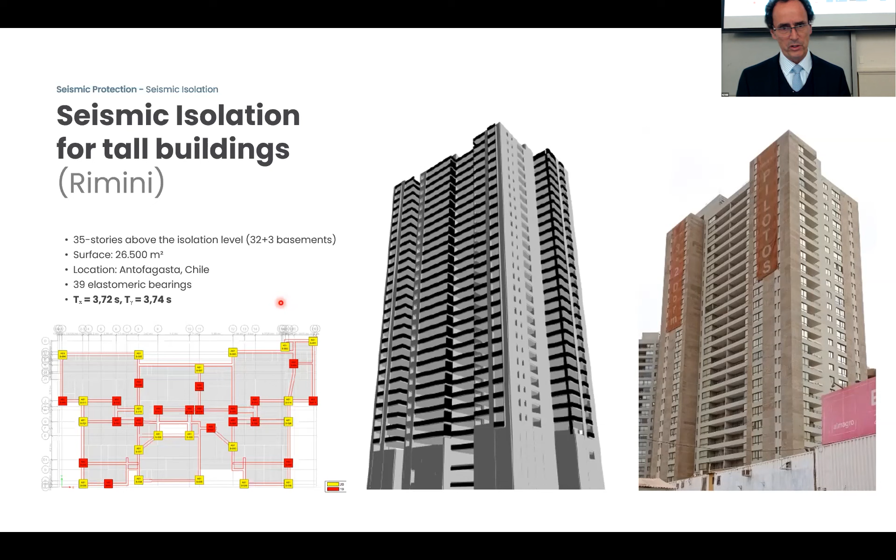There are also a lot of healthcare projects in Chile already being implemented with seismic isolation. This is the cost breakdown in Chile, which you'll have in this presentation. One UF, the unit you see here, is basically 36 US dollars. This is the summary of all the projects we've done in Chile in terms of cost for seismic isolation, energy dissipation, and tuned mass dampers. For energy dissipation, we have the metallic component first, and then the viscous part.

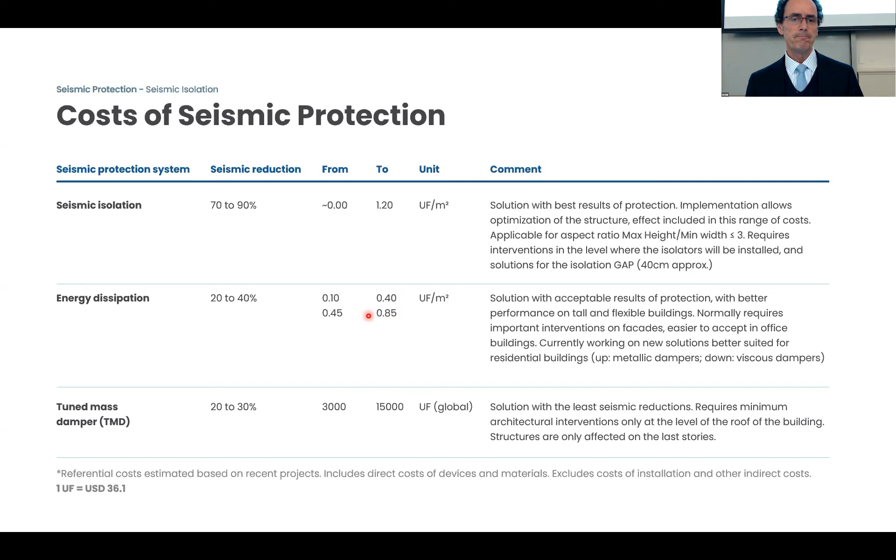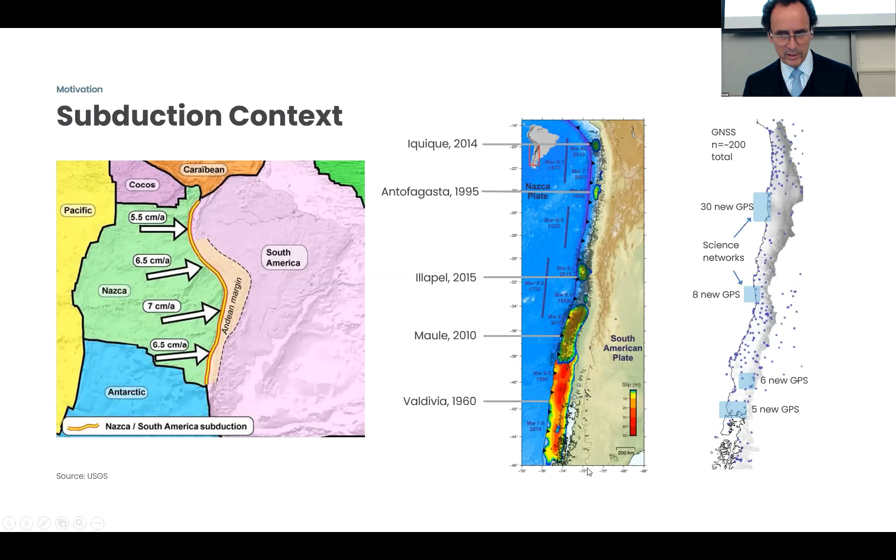Let me just finish—I was speaking a bit about resilience, but basically what we're doing is... sorry, I went the wrong way. Oof. Yeah. Oh no, I went the wrong way. I can go to the end here. Maybe it's okay. No. Sorry.

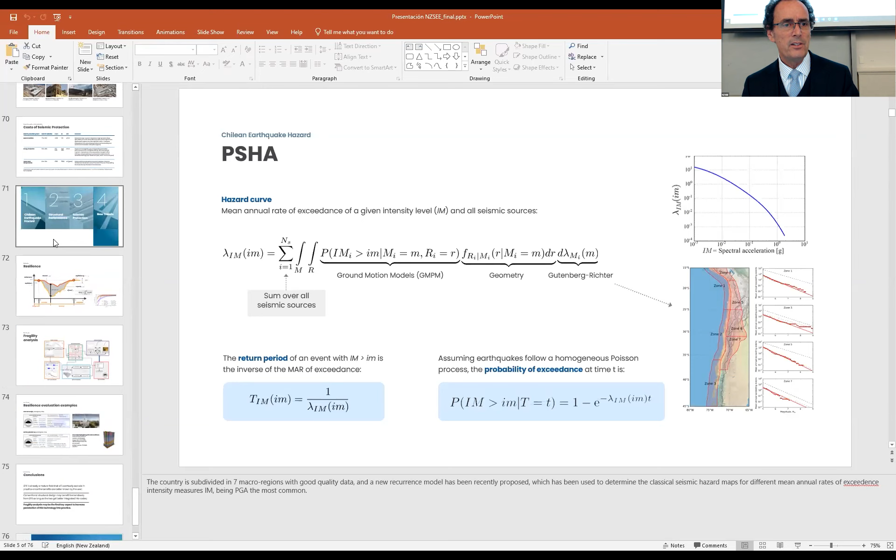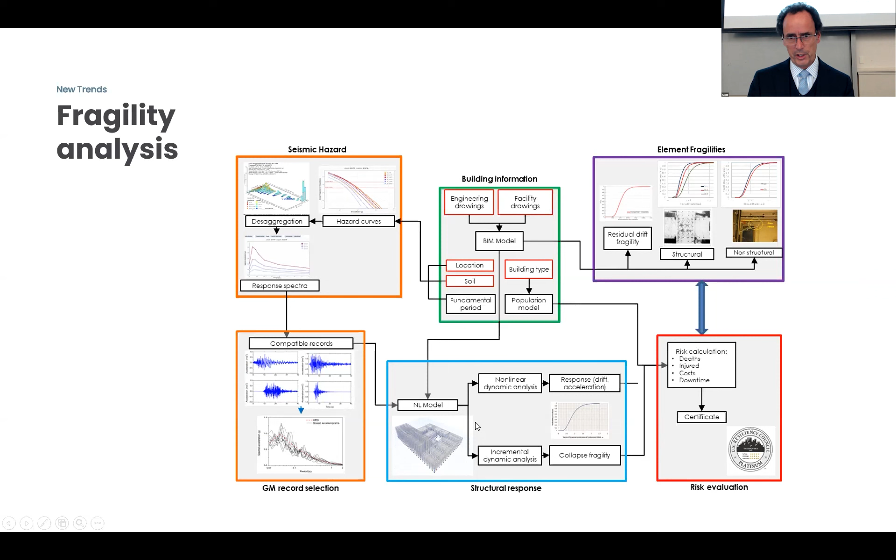Just to give you a one-minute summary: we're incorporating resilience evaluations of buildings in Santiago, with full fragility analysis of the buildings, to make sense of the isolation and energy dissipation incorporated into the buildings. We're following the FEMA P58 procedure quite closely, and basically producing ratings for the different buildings in the country.

Just to finalize, I wanted to say that, at least in my impression, seismic protection today is a very mature field that will explode at some point. I'm pretty sure once the benefits are really better known by users, especially when you look at the life cycle of a project—if you look only at the direct cost today, there's always this kind of conflict where you're not seeing the whole life of the project. The second thing that isn't really well done is how seismic protection gets incorporated into codes. I think there's a lot of work to do there to make this more effective, and that could be another important thing.

But the most important thing is to try to incorporate fragility analysis into all of this analysis—really look at what's going to happen to the project, not only in terms of direct costs, but also in terms of the complete life of the project. I think once this is done, seismic protection will obviously become a dominant technology in building practice. Thank you so much for your patience.

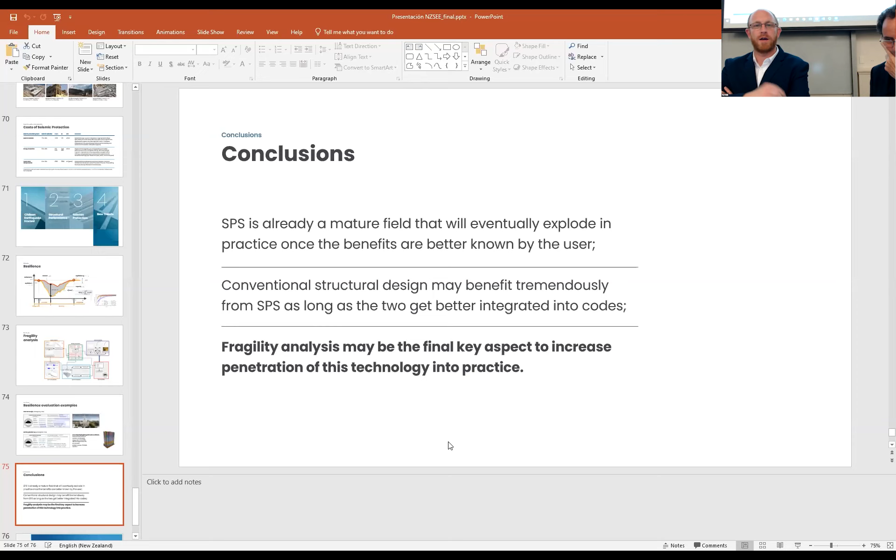Question here from Tony. I think you sort of touched on what my question was: what proportion of clients in Chile demand or know about seismic protection systems, and when do you predict the explosion in that field will occur, and what would be required for it to happen? So if I can summarize that for online, Tony Holden is asking essentially what percentage of clients in Chile might be aware of the existence of seismic protection technologies and might require a push for those to be implemented, and when might that explosion in demand occur?

It's still very small. Everyone today is really aware of the technology. But somehow the process is something they have not incorporated into the normal things they do for a project.

It's not a design issue, because today, for example, our students follow courses in seismic protection within the university. They know how to design these devices, so there are people already preparing the country for doing those designs.

The problem has more to do with the effort the construction company needs to make. For example, in the case of seismic isolation, the gap is one issue. The flexible connections for all the piping and things like that get a little complicated.

We try to convince them by looking at insurance premiums. We've worked with insurance companies for a long time, but the problem with Chile is that the country is still small in terms of the insurance industry, and all the reinsurers in the world, like Swiss Re or Munich Re, look at South America as a single thing. They cannot distinguish between a hospital that has seismic isolation from the whole bulk of hospitals in South America. That part still needs a lot of convincing.

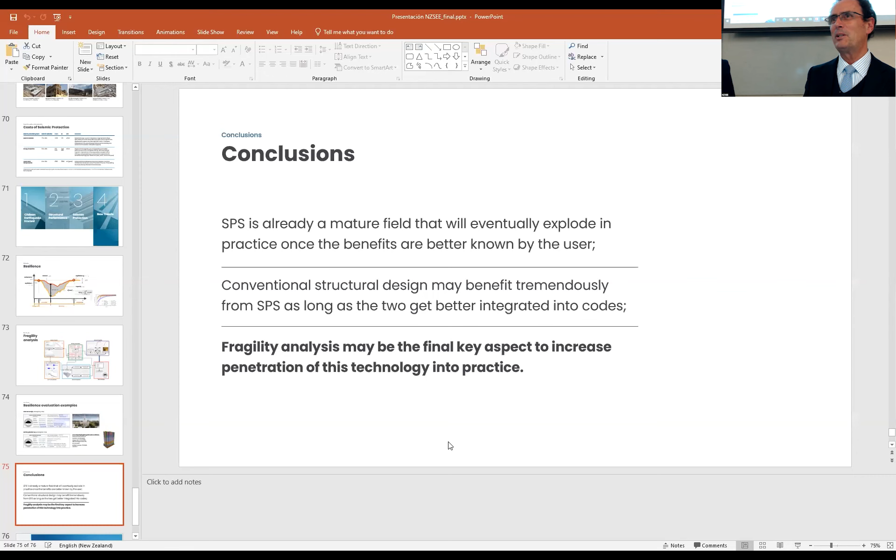The explosion in Chile occurred in 2010. After the earthquake that year, everyone wanted a building with seismic isolation in the city. We didn't have the capacity to just do it. But then people started to forget about that, and 4 or 5 years later we were back in the same equilibrium we were probably before.

That's the situation we have in Chile. We have about 10,000 buildings that could have seismic protection, and the number of buildings we have today that are seismically protected is about 150 of the 10,000. So it's still a very small proportion of the buildings. The experience is very similar across the region.

So, one final question based on a question submitted online. In New Zealand, some engineers define locations for dampers or isolators randomly and then check the behavior of the structure using nonlinear time history analysis. How are you defining the initial location using simple linear methods to get the most cost-effective solution, price against force reduction for a building, and then checking that using nonlinear time history analysis?

I have a good tip for the person. There is actually an optimum for the location of dampers in height, or in the structure. Actually, the optimum is not the recommendation I'm going to make, for a reason I'll explain in a minute.

But if you want to control a mode, let's say the fundamental mode of a building, you'll realize that the optimal location for damping is the story of that building where the maximum interstory deformation occurs, to the square — there's a square term involved. Of course, that's the same as the maximum interstory drift. So the optimal distributions are always localized, which is bad because you can't put all the damping in a single place in the structure — you're going to kill the nodes.